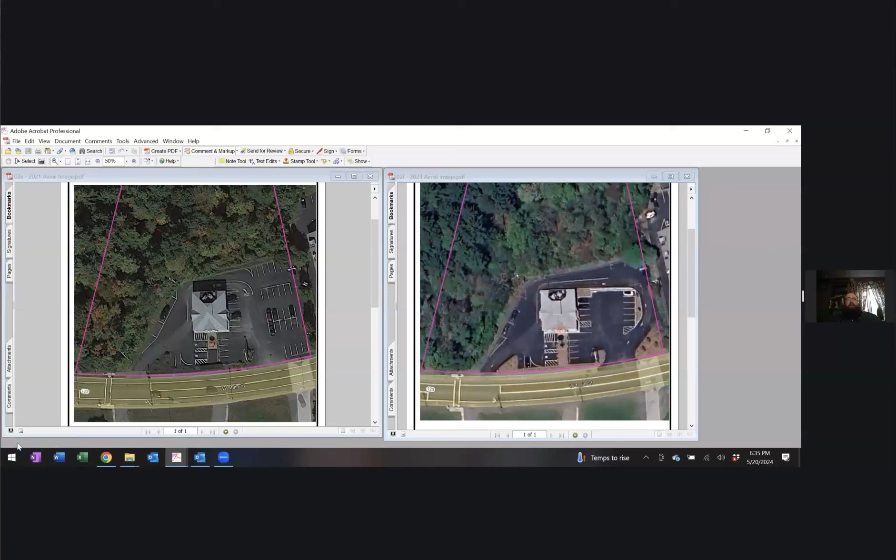We've taken a pretty deep dive into this as far as what they did, and that's where the plan comes in. The things that you see shown in red are the things that changed on the site. So first, what you'll notice is that this whole area here and this area that is admittedly outside a buffer zone turned pervious from impervious. So that is a benefit, basically. It helps with stormwater retention and things like that. The other thing is there was a small addition of pavement in this area here that I believe was just kind of squared off to help cars get past the building and give a bypass lane to the drive-through aisle.

So they did create about 130 square feet of impervious surface within the buffer zone. You'll note just by these dimensions, it's about 2 feet further away than the closest point to the BVW was prior to that. It did not require any additional tree clearing or anything like that. It was just an area of lawn that was turned into impervious.

But the other thing that you'll notice is whoever did this did it with the existing drainage structures in mind. You'll see if we zoom in, there is an existing catch basin in this location. This was existing prior to the changes, as was this. So all of the stormwater that collects here is still directed to the catch basin that it was originally directed to. So stormwater conditions on site, stormwater patterns haven't changed. All of the runoff is still going to the same area that it was before.

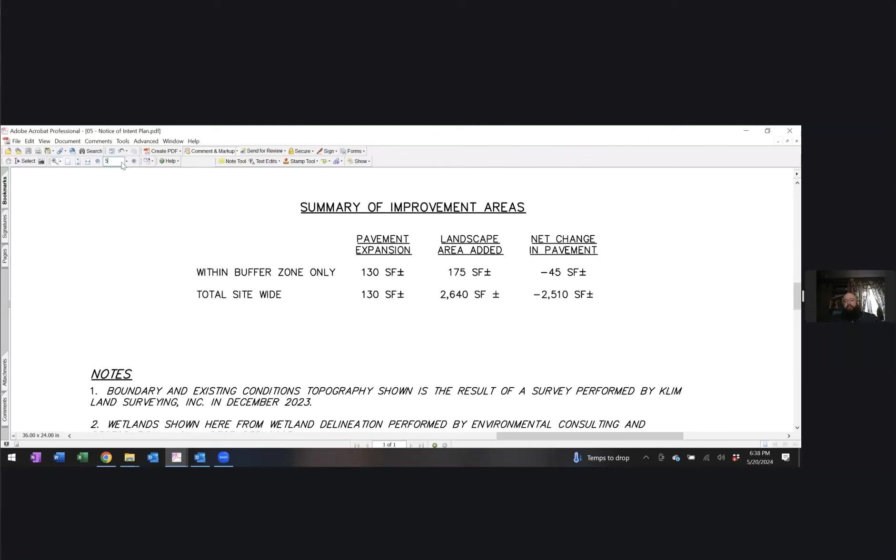So if we just take a quick look at the side of the page here, we'll see that we ran some calculations, and within the buffer zone, they actually reduced pavement by 45 square feet. It's very negligible, but so be it. Total site wide, they reduced by about 2,500 square feet. So again, I think that's actually an improvement over the existing conditions, or the prior condition, I should say.

You know, knowing this commission, I would posit that had they come forward with a notice of intent to do this work, I believe an order of conditions would have been granted. And I might go as far as say it may have been possible to file an RDA on something like this, considering that it's really just a reduction of impervious surface.

So what we're asking tonight is that the commission, really just to dot the i's and cross the t's, will issue an order of conditions for the work after the fact. And then our plan would be to let the appeal period lapse and then file for a request for a certificate of compliance as soon as possible, just to get everything in good standing where it's supposed to be. So Mr. Chairman, that's all I've got. I'm glad to answer any questions.

So currently the stormwater system is functioning normally, and there were no performance problems with these changes, I'm assuming? None that have been reported to us by the owner of the property or that we've heard from the town at any point. So we have no reason to believe that it's been an issue at all. And this was initiated by a change in the property owner? Is that part of it, or?

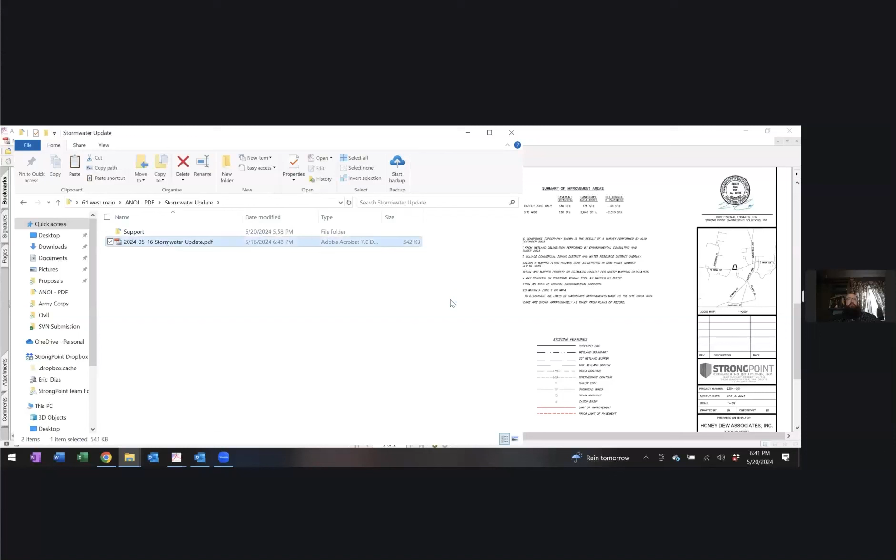What was the nature of that information? Was it, because one of my first questions is, you have catch basins to capture the flow, but you didn't talk about where that discharges and what the existing water quality features are? Sure. In fact, let me pull up that stormwater update and I can share it with you right now. Mm-hmm. So what we did just in response to Jacqueline's request is just go through and enumerate how this particular change affected the performance standards given in the stormwater management handbook.

So basically standard one is no new discharges, and this work did not result in a new discharge to a wetland. Everything goes to the place it went before. I'll group these together for peak rate attenuation, recharge, and water quality. Just basically, even without running the numbers, anytime we reduce impervious surface that vehicles drive on, we lessen peak rate runoff. We increase the ability for recharge and water quality on the site. So those are a benefit. The last few standards, 5 and 6, do not apply. 7, this is a redevelopment project, so the standards would apply to the extent practical.

Standard 8, unfortunately, we missed the bus on construction period controls because this is after the fact. 9 is an operations and maintenance plan. We're operating under the belief that there's an operations and maintenance plan in existence for this because we don't know of any issues that we've had so far or that have been reported to the town. So the applicant has just agreed to keep maintaining the system as he always has. And number 10, we actually did, because I don't know that this exists, provide an illicit discharge statement. That basically just says that we're not aware of any, and we will continue to make sure that none come up.

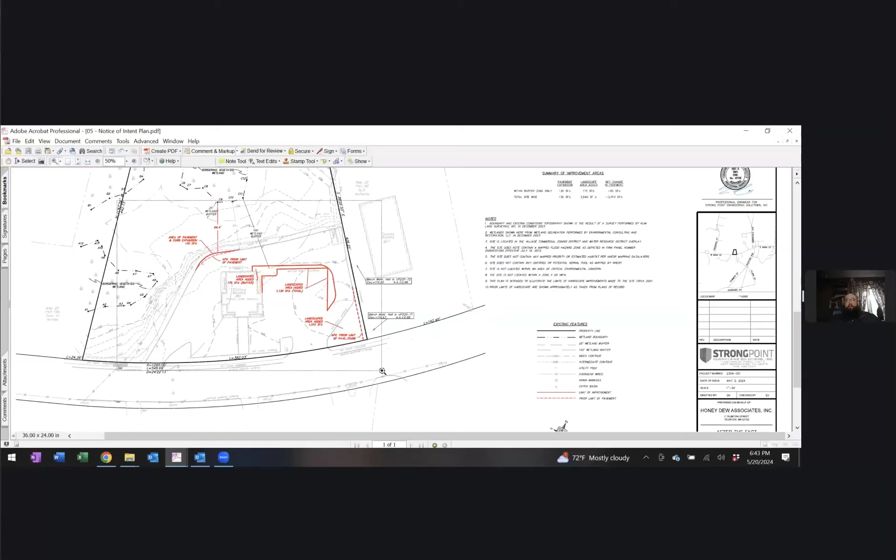So they're operating under an O&M plan that tells them how often to clean the catch basins and whatnot. Can we get a copy of that? Yeah, I can either find a record of it from them, or for that matter, if there's something that doesn't necessarily exist or might be subpar, we can even beef it up and make it better. Okay. And so can you just go back to the site plan, where that discharge is now, and if there are any water quality units on the site? Yes. I do not believe, just from a visual inspection, that there are any water quality units on the site. The only thing that we were able to find, as far as we looked at this point, was just these catch basins that you see throughout the site. There's one here, here, here, here. There's 5 or 6 of them.

Yes, go ahead. Oh, so does it discharge to the municipal system, probably the state system in 123, or does it discharge to the wetland? Well, I don't know for sure. We didn't check that far because what we considered for our purposes now is that the water is going to all the catch basins that it was before. Everything appears to be functioning properly. But my expectation, just looking at this, I think the catch basins that are closer to the frontage are going out to the municipal system, and the stuff in the back is going to the wetland one way or another, whether there's subsurface infiltration. I tend to doubt it; this was built around 2000-ish. So it's probably a free discharge.

So there's no provision for water quality, because typically when somebody comes in for any type of project, redevelopment or not, we look to try to improve water quality. Now, granted, removing several hundred square feet reduces impervious surface. It does not treat pollutants associated with probably a high turnover of vehicles here, pollutants such as oil and grease. So I think personally, I would want to know, first of all, where the discharges go before we think about what we want to do to improve water quality out here.

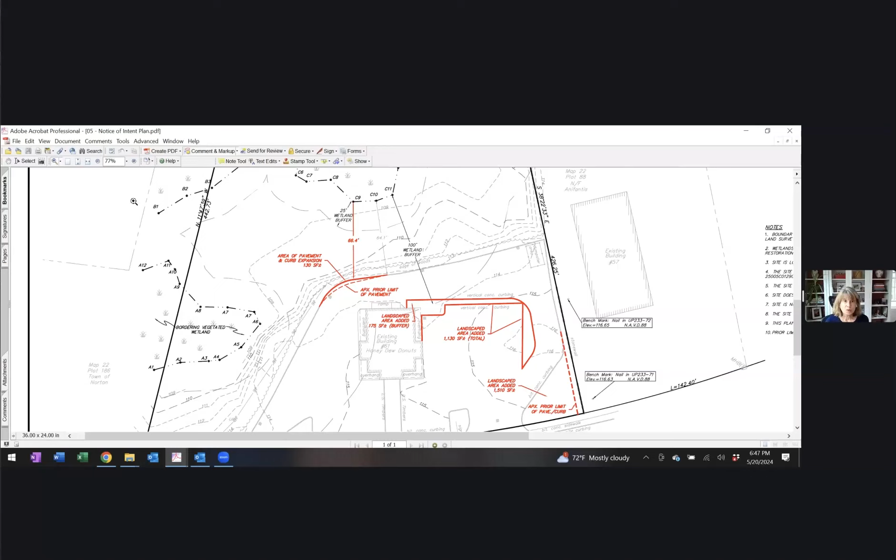Yeah, certainly, we can get that information. The only point I just wanted to add on to that is, the only reason that we didn't chase it that far was because, again, as a redevelopment, it would be subject to the maximum extent practicable. And where this is an after the fact situation, we thought, okay, well, we are having an improvement, we're flowing to the same spot. Didn't know that much more would be warranted, but certainly we can dig more into that if we need to. Right. So after the fact doesn't absolve you from meeting water quality standards, or at least addressing it to try to improve it. Understood. Thank you.

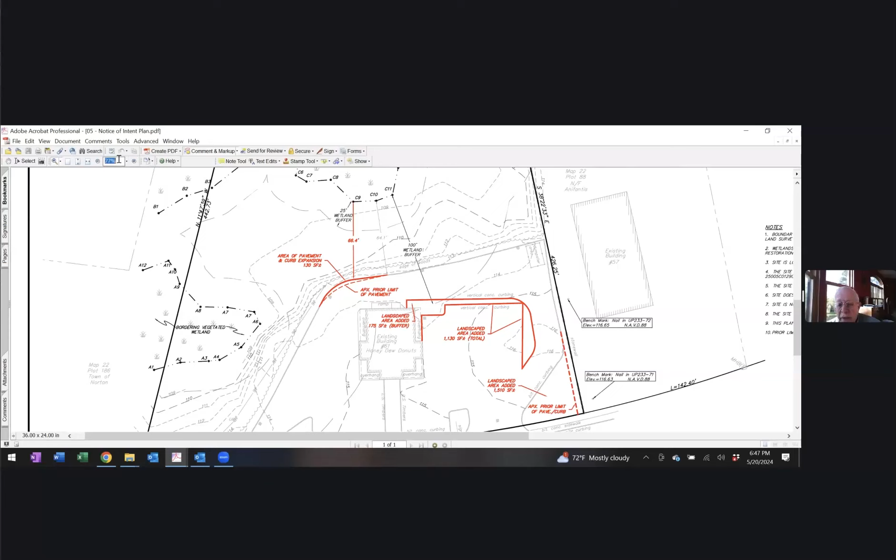Further questions from members of the commission? Any questions from anyone in the hearing? And just to review that, you can go to the reactions button, and when you press it, there's a hand raise button, or you can just speak up to be recognized. But this is not a big project, since it's already after the fact.

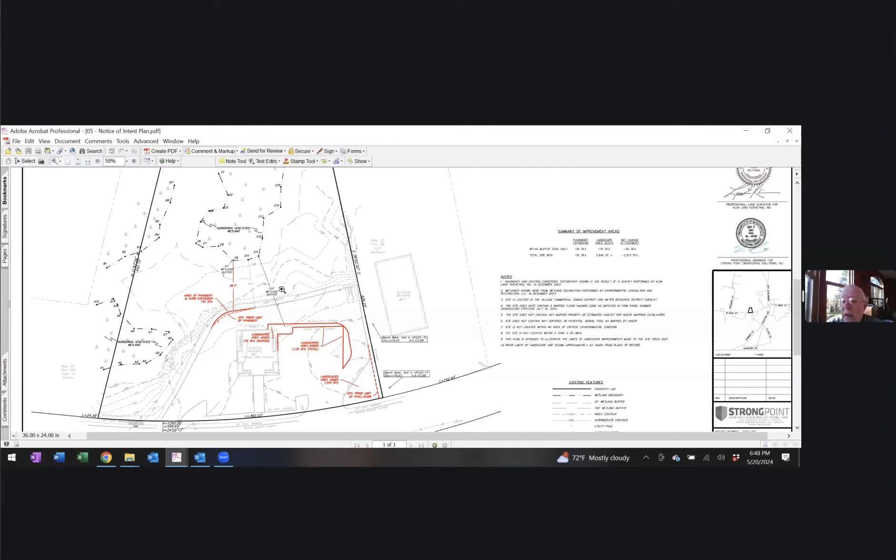So we're not going to be closing any hearings tonight because our director is unable to attend, and he'll be reviewing the tape on this. But our next meeting, I believe, is June 10th. I assume you would be amenable to continuation until then? And we can also deal with the questions that were put forth tonight. So if we're all set with that, we can consider a motion to continue this hearing until June 10th.

So moved. Second. We have a motion by Joe, seconded by Dan. As is necessary, roll call vote, starting with Paxton and Dan. How do you vote? Aye. Aye. Mark and Joe? Aye. Mark, I didn't hear. Joe and I spoke at the same time. I said aye. Okay. And Lisa and Tama? Aye. Aye. And I'll say aye, so motion carries. Thank you, Eric. We'll talk to you next time. Thank you. I'll get that information and get back to you. You bet. Thanks.

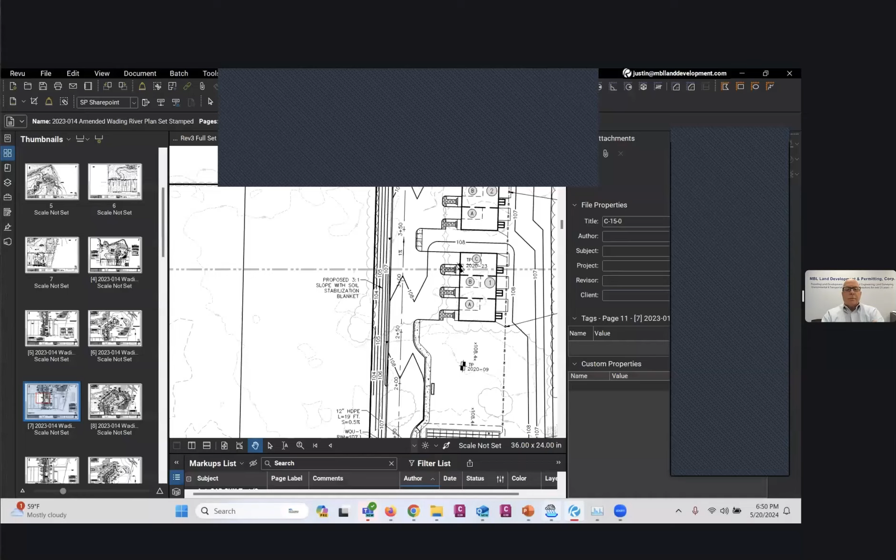Our next new public hearing is file number 250-1052, Wading River Estates. This is a previously presented project, but is now requesting an amendment. Do we have a representative of the applicant? Yes, I'm here, Mr. Chairman, members of the commission. Brian Dunn. All right, and I'm assuming you probably have screen sharing capabilities. I'm gonna have Justin Williams from my office share his screen. Megan, can you give Justin sharing rights, please? Hello. Let me know when you've got the screen ready to go, Justin. Here we go. All right, we see a plan.

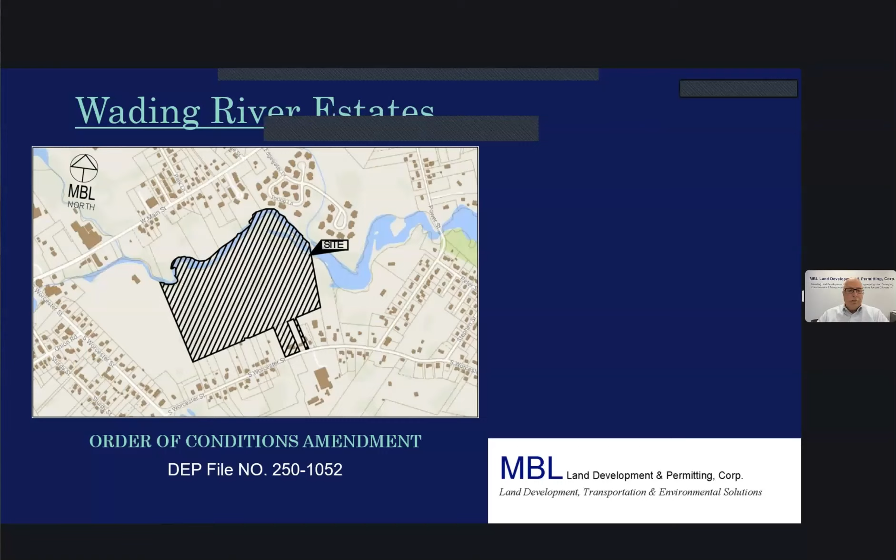So, members of the commission, my name is Brian Dunn with MBL Land Development and Permitting. Our offices are located at 5 Bristol Drive in South Easton. And Justin, you're gonna close your web browser. Or is that mine? Okay, thank you. And I'm the principal of the firm. We're here on behalf of Joan and Scott Stormo. As you know, we've been in front of the commission. We do have a DEP file number, as you can see on the screen. We do have an order of conditions for this project.

And what we've done is we've come before you recently, within the last few months or so, and discussed the process of filing an amendment to the plans. And it was our understanding that the commission was willing to go along with a review of the request for the amendment. So we've submitted a request for that amendment, and we've prepared a slide presentation to give you an understanding of the differences from the originally approved set of plans to the amended set of plans. The number of units is the same.

As you can see, the left-hand side is the original design, which utilizes the existing home at the front of South Worcester Street, and then the units coming into the site, and then the proposed septic system in the middle of the site, and a little bit off the page is the drainage basin that was originally designed. So you can see where the units were originally laid out and the limit of work and the limit of clearing. On the right-hand side, there's been a large reduction in the amount of pavement. There's a reduction in the amount of clearing, limit of work. And there's also been a reduction in the area of the buffer zones with this revitalized plan amendment. So if you want to go to the next slide.

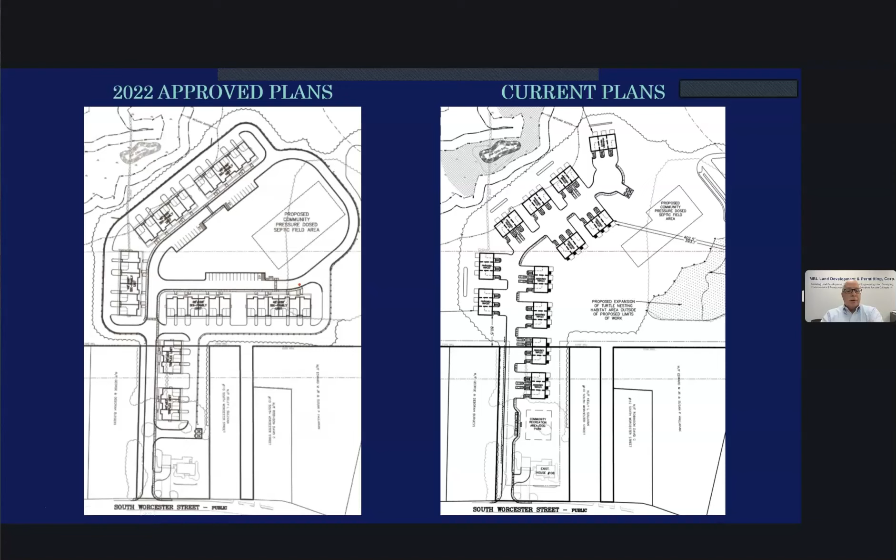With that reduction in pavement that we originally discussed comes the length of road. As you remember, we had originally had pavement going around the units and around the septic system because of the style of the homes and the design of them, as you can see from the left side that Justin's pointing to. So most of that area is being removed, and the pavement behind the homes is being removed and replaced with lawns and grading and sloping down to that 25-foot no-touch alteration zone, with a reduction in the retaining wall for the pavement that was going around the back of the units.

So that reduction in roadway length is about 1,000 linear feet of roadway that we're reducing as part of this plan amendment request. And the increase in open space. So with these revised set of plans, we've got a 47% increase in open space and landscaping areas that weren't in the originally approved plans. Next slide, please.

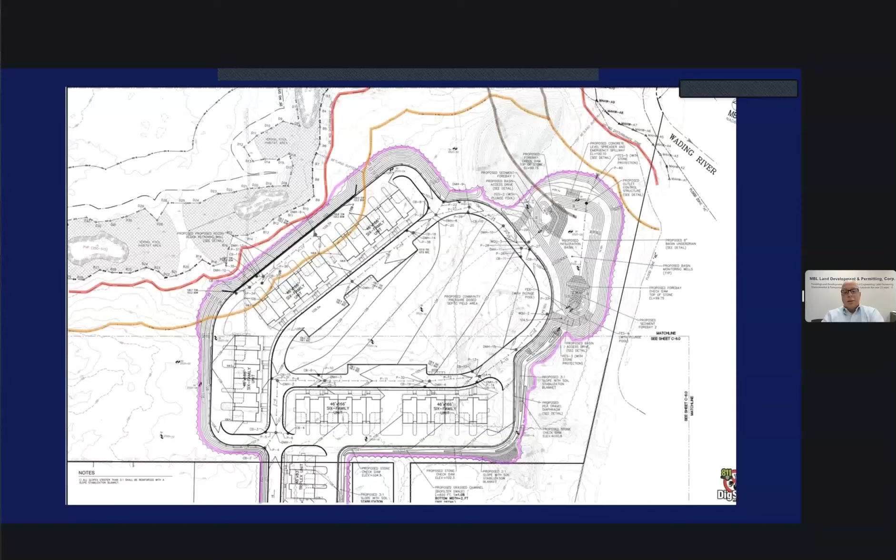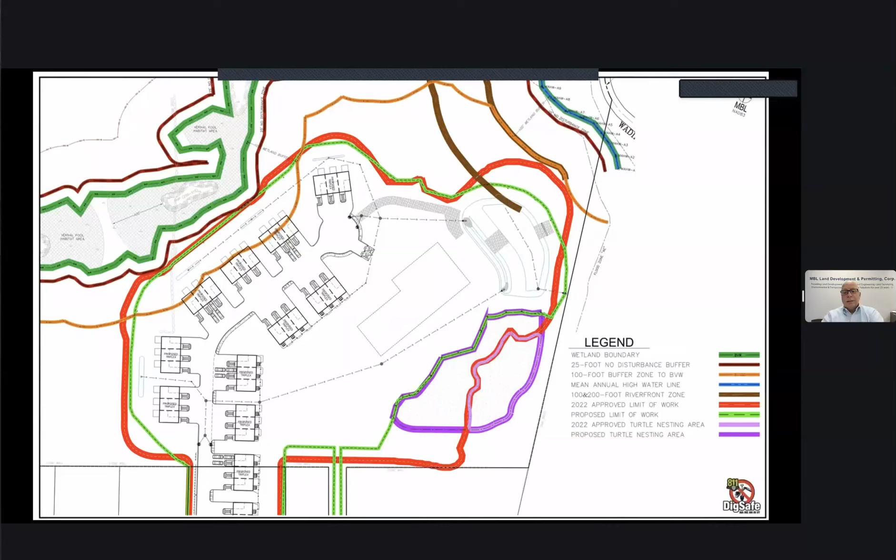This is a little bit more detailed layout plan to show you where the units are, the turtle nesting area, where our proposed drainage is going to the right, or to the east of the site, and the area of clearing, the new tree line, which is the limit of work, which is also shown in this plan. As you can see, we are still outside of that 25-foot no alteration zone. Next slide.

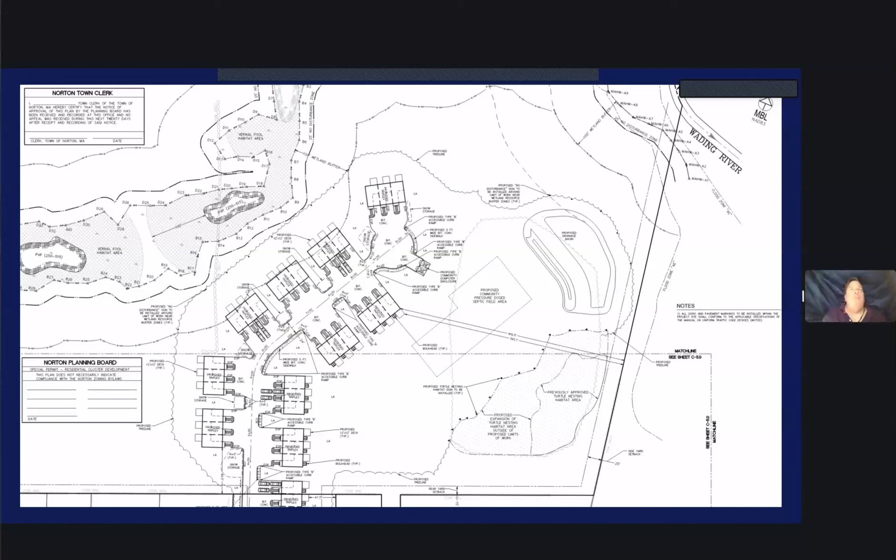And this is a portion of the site plan, the grading and utility plan that we prepared. As you can see, we do have a stormwater basin for our drainage design. We have forebays, water quality structures. There's 3 of them. We have our drainage basin with the 15-foot bench around the top for access and maintenance. This design here also reduces the amount of fill by roughly around 20,000 cubic yards of material.

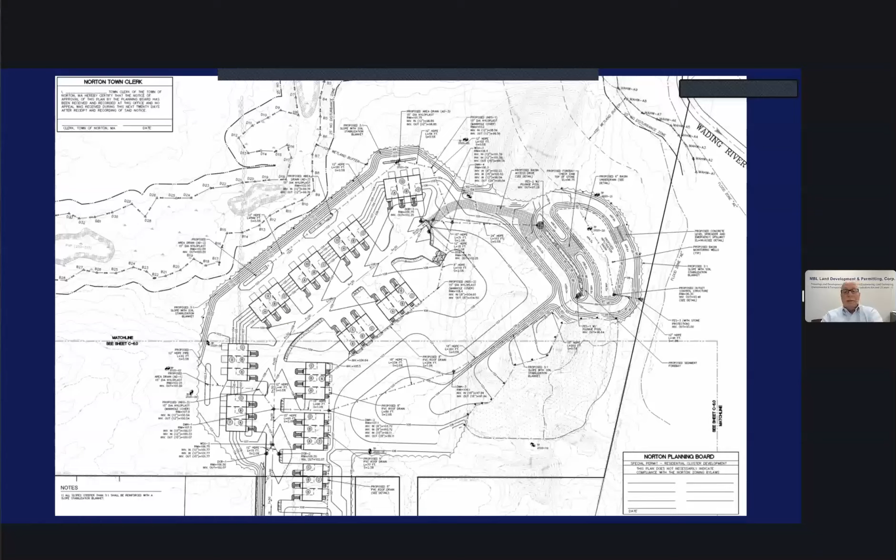And what we tried to do on this slide is show you the difference of the fill and the cut areas for this site. And you can see just from the 2 pictures you have in front of you, in regards to the earthworks, the difference in the size and the magnitude of the project that has been reduced as part of this plan amendment. And I think I said 20,000 cubic yards, but we have right here about 25% reduction in the amount of fill material that's needed for this project, which also makes it more economically viable for our owners.

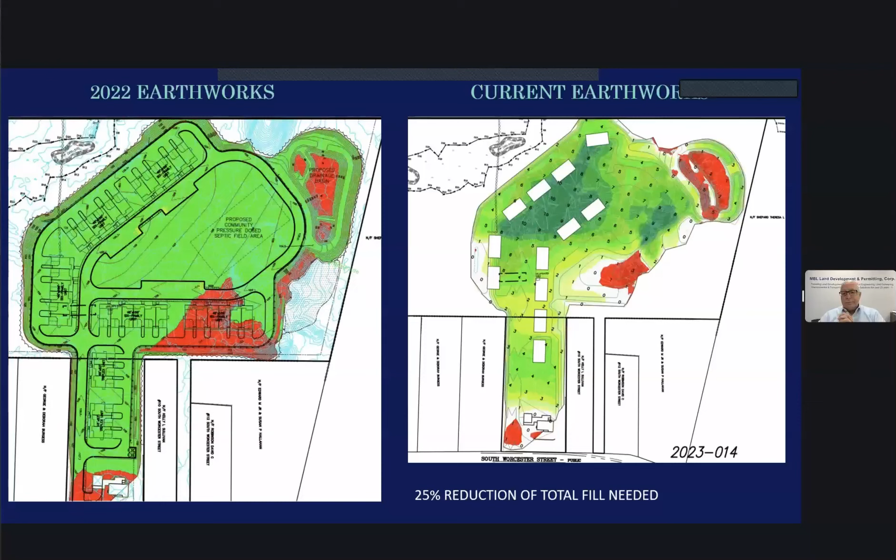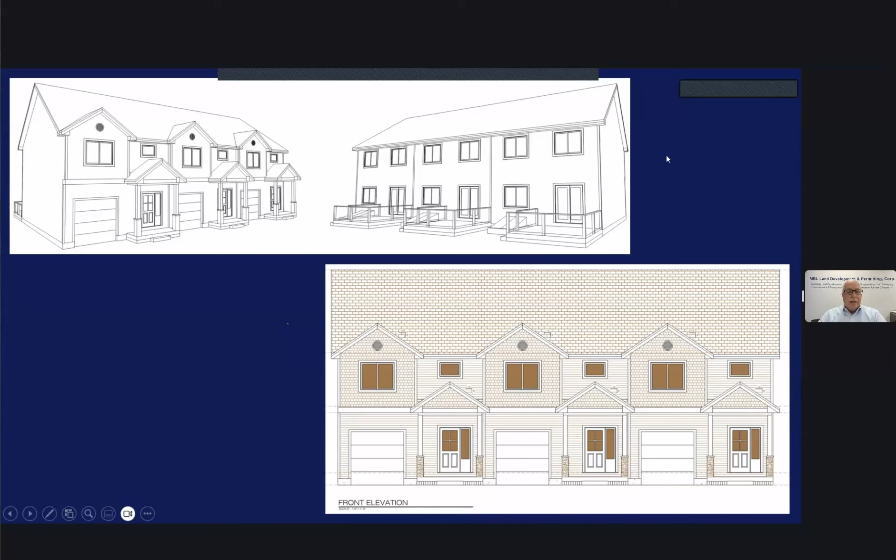Next slide. And then these are the new design of the units, the triplexes. They all have a one-car garage. They have decks in the back. They will have basements here. So it makes it a little bit easier for the grading and the design of the site, and helps us out with minimizing the amount of fill. Mr. Chairman and members of the commission, that's pretty much our presentation with our request for a plan amendment. If you have any questions, we'd be more than happy to answer them at this time, Mr. Chairman.

Yeah, I'm just wondering if the fire department has reviewed this new design, because they have a tendency to like to have an access road behind the buildings, but that's obviously not our purview. That's obviously a detail you're gonna have to review. Yes, we're going to be in front of the planning board, and I'm sure that the fire department will chime in at that time. I can tell you the fire truck access through the site, down the roadway to the cul-de-sac, is large enough for the fire truck to enter and turn around in the site.

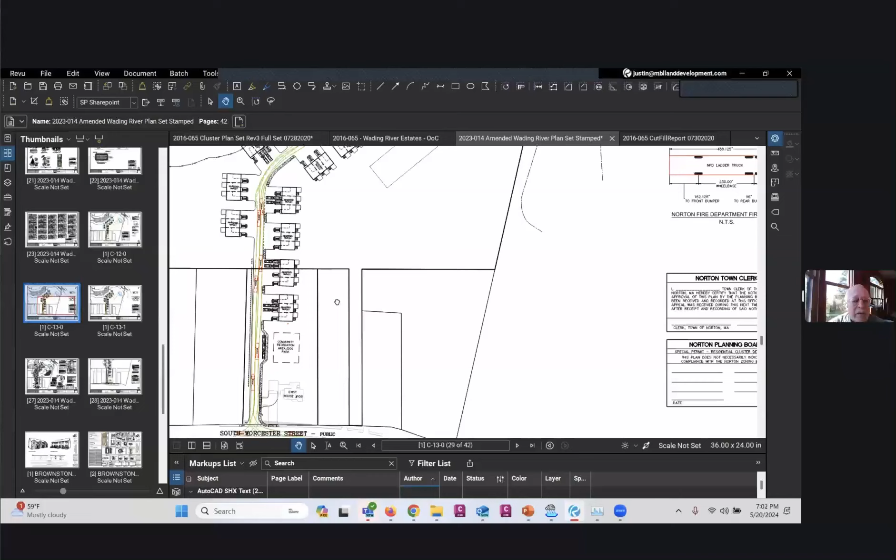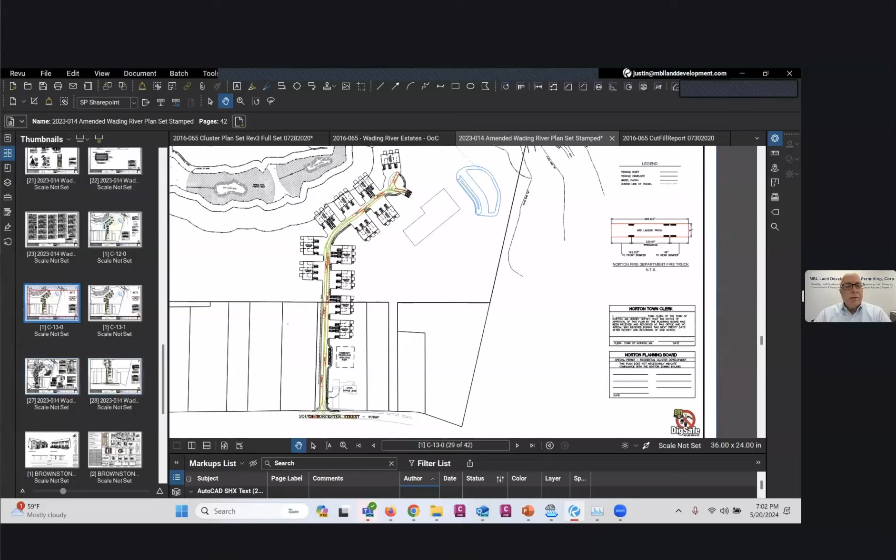Yeah, we don't have to review that here. What you had before, you had pavement behind, so they couldn't complain about that. Clearly from our perspective, it meets the intention of the Wetlands Protection Act. Yeah, Mr. Chairman, I think this is a much better plan. It's more environmentally sensitive, and with the truck traffic on construction and the amount of fill, it's a lot better plan, because it was really driven by the style of the units before. The units were all on one level, and here we can step the foundation in the back of some of the units, so that we don't have a lot of fill coming in. So that's where that 25% reduction is coming from.

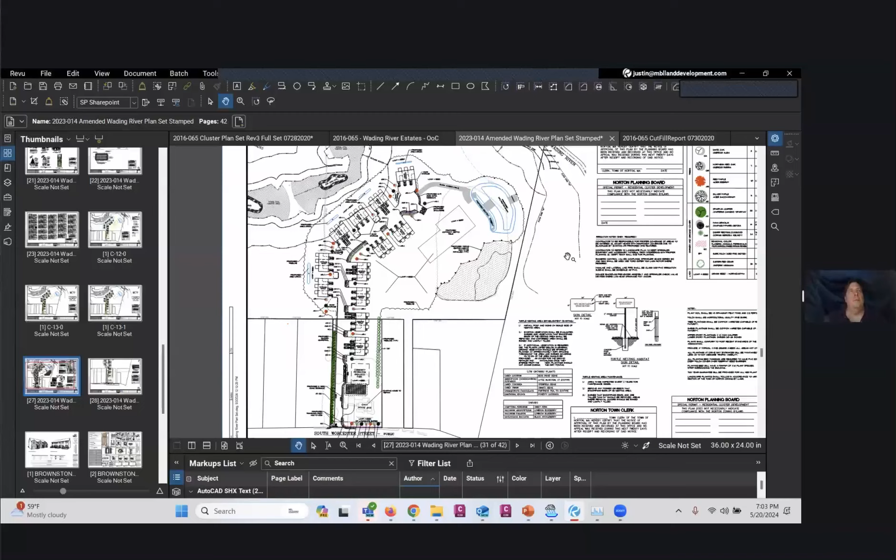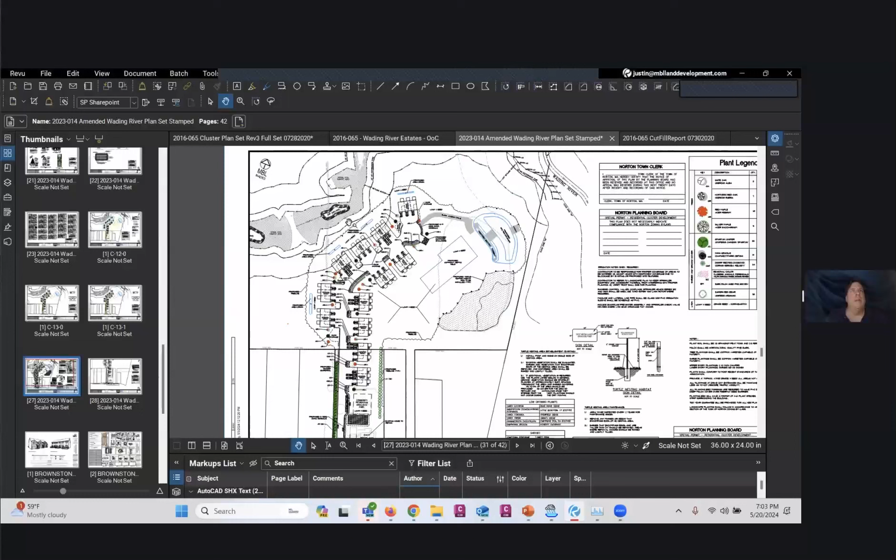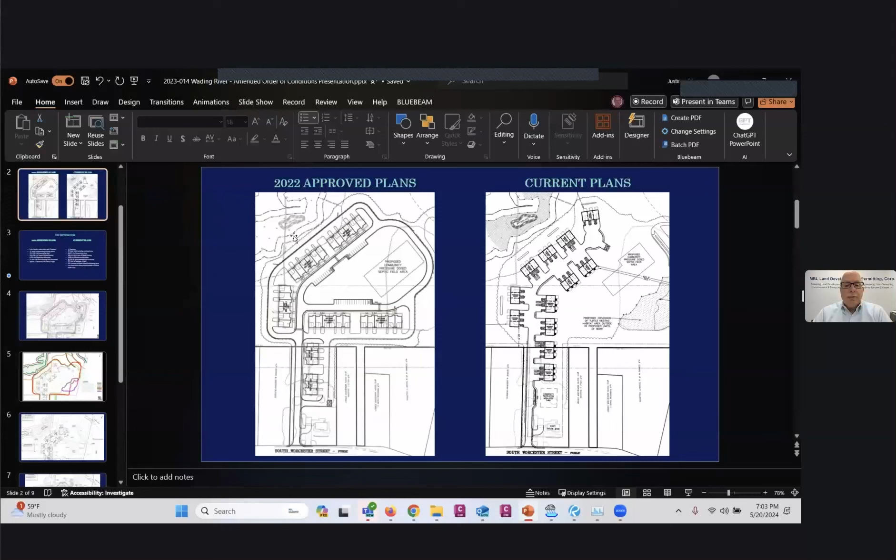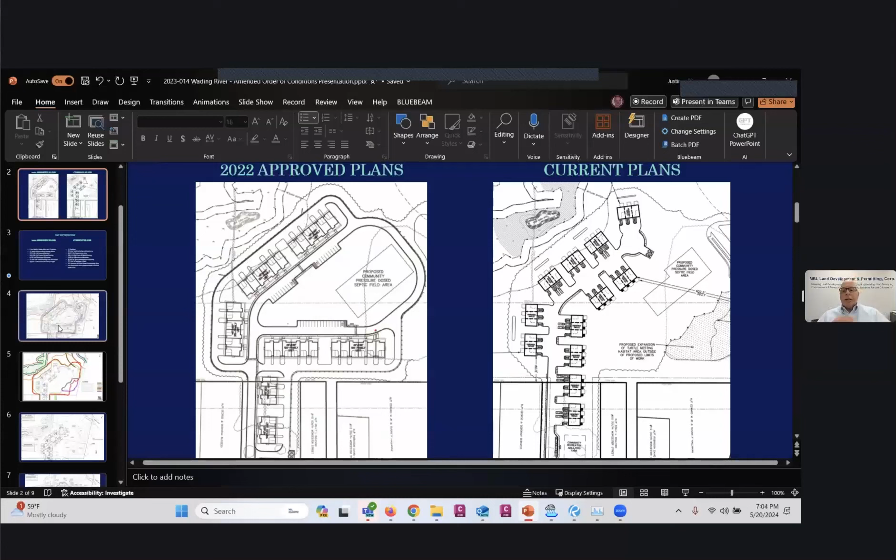All right, yeah, go ahead. First, I appreciate this being a more environmentally sensitive change. That section in the northwest of the site, maybe I misunderstand, but is that line indicating that all that part is within the 25-foot buffer zone? Or how have I misunderstood? Could we see maybe the first slide again? Yeah, I think it abuts right up against it. So originally we had it approved right up against that 25-foot buffer zone in that area. We had some tree clearing right up against that zone, and we had a retaining wall to keep the fill away from that 25-foot zone, and we're still maintaining that in our new design. You can see the grading and the retaining wall that we had.

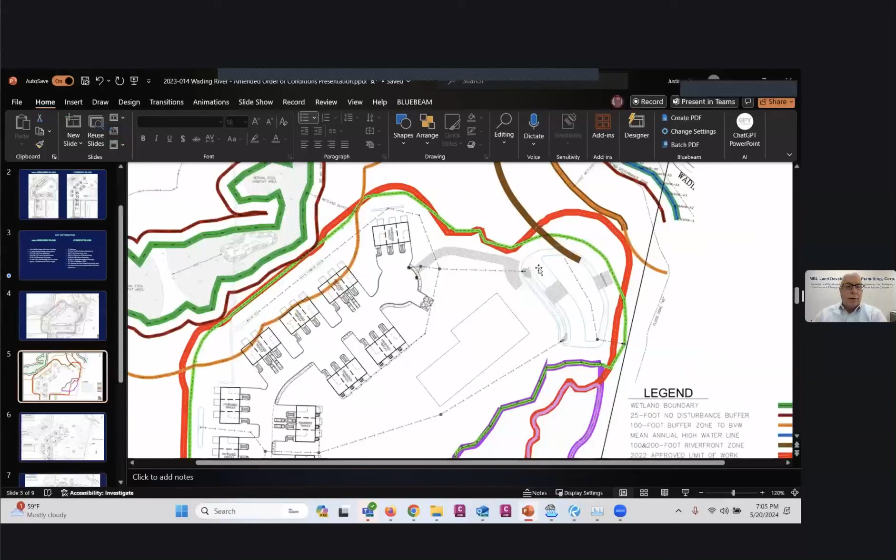Justin's zooming in. So the red line is the 25-foot buffer zone. The purple line is the limit of previously approved work. And the tan line that's running through some of the sites? That's the 100-foot buffer zone. Okay, I see. And then that brown one to the east he's highlighting, that's where the riverfront area comes into the site. Part of the riverfront regulations does allow and permit the construction of a detention basin within that zone. And that's the area we had the drainage before, or we wouldn't have gotten an order of conditions. And if you remember, we got this order of conditions with some of the members that are on this commission, and your agent at the time was Jennifer Carlino.

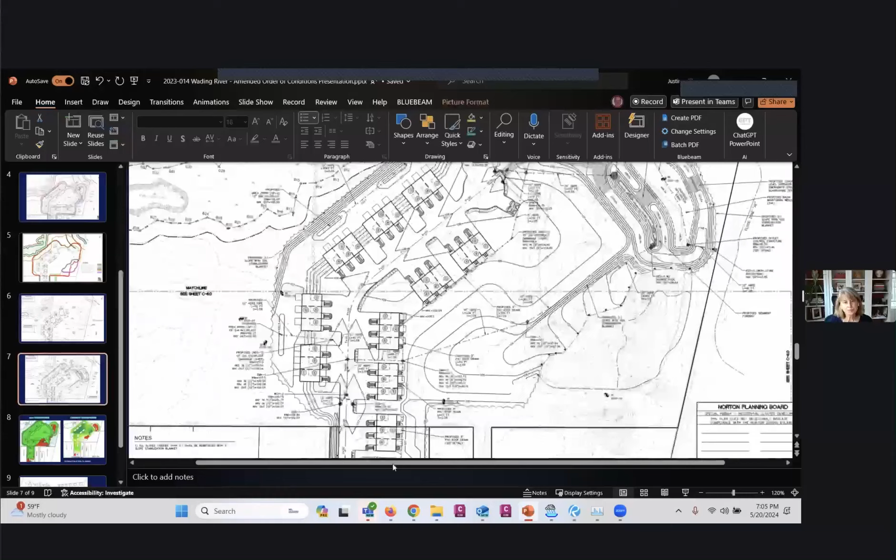Could you just go over what the common space is gonna be, the open space? So there's a bunch of different common spaces. We have a community area here to the rear area of the existing house lot. And then there will be an area of open space and common space above and around the proposed septic system. A very, very large area.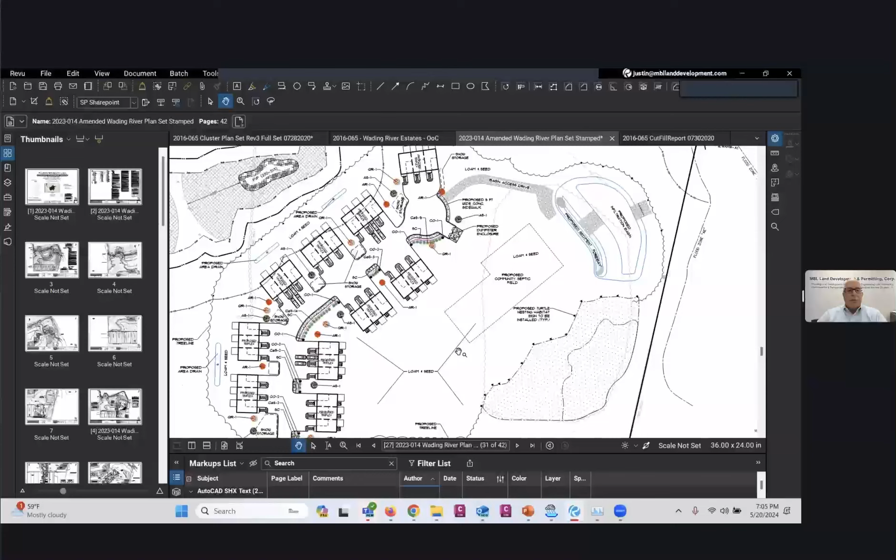Okay, I assume this request for amendment has gone back to Natural Heritage for review and approval? As far as I know, I don't remember this being part of Natural Heritage. But you have turtle nesting. Yeah, if I may, Lisa, this was under the purview of Jennifer at the time when she was the agent. And she thought, because of the turtles and some of the eggs that she had seen, that it would be advisable to have a turtle nesting area.

This wasn't a recommendation of Natural Heritage. This was a recommendation of your agent. Okay, so you went along with her. You weren't in priority or estimated habitat as far as the state was concerned? No. Okay, I got it. So what we tried to do is review and discuss that information with Jennifer. We came up with a plan to show that turtle habitat, and she was more than satisfied at that time.

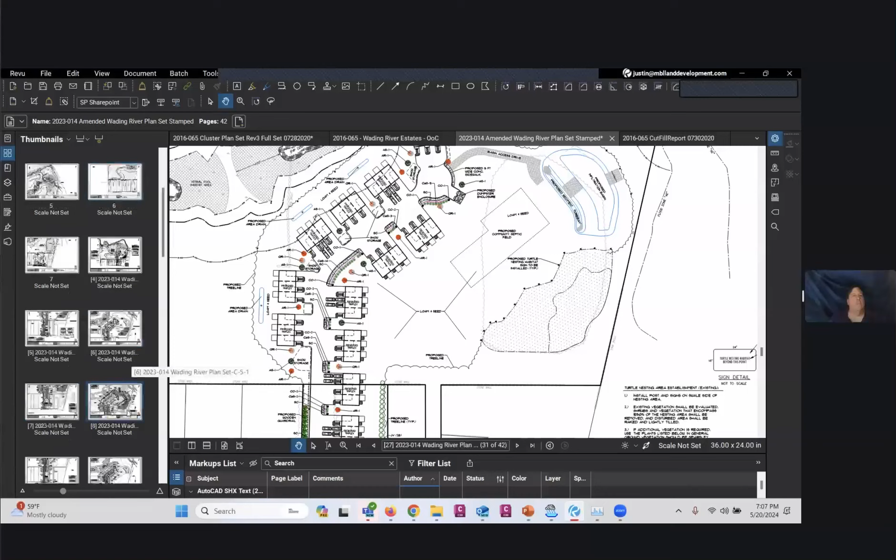Okay, and the last question, I just want to go over that limit of clearing. Now that you don't have to do so much grading, what's driving that? Just the rear of the units. Are those had an infiltration trench back there? So there's really area drains in the back of those units, so that we can still make sure that any of the runoff that's coming from the back area of those units is being captured, and then that's being brought to our detention basin to the east side of the site.

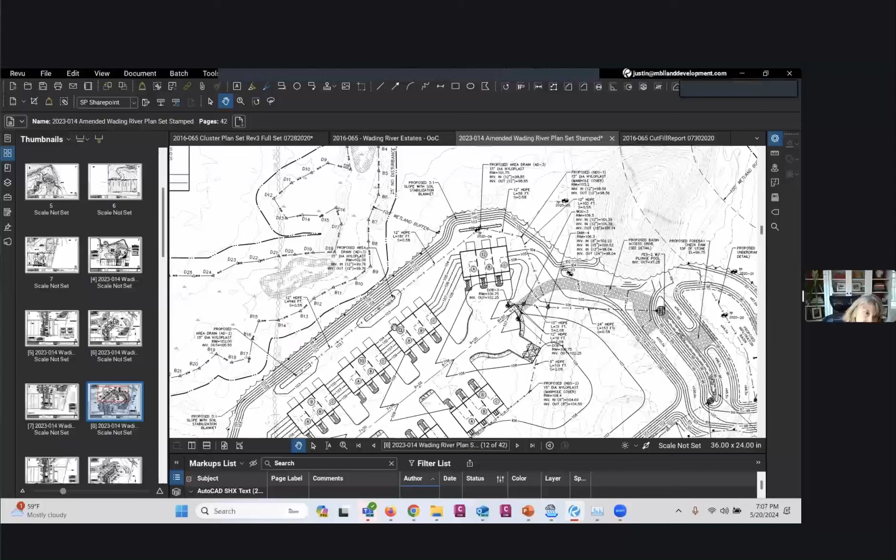Okay, so what is the distance between the back of the deck and into the 25? And did you do everything you could to minimize that intrusion right up to the edge of that 25? It's about 20, 30 feet to give them a little bit of a backyard with like a 2 or 3% slope. Okay, so you still have to have some grading back there, I see, to get back to grade to 98, is it? I can't read that.

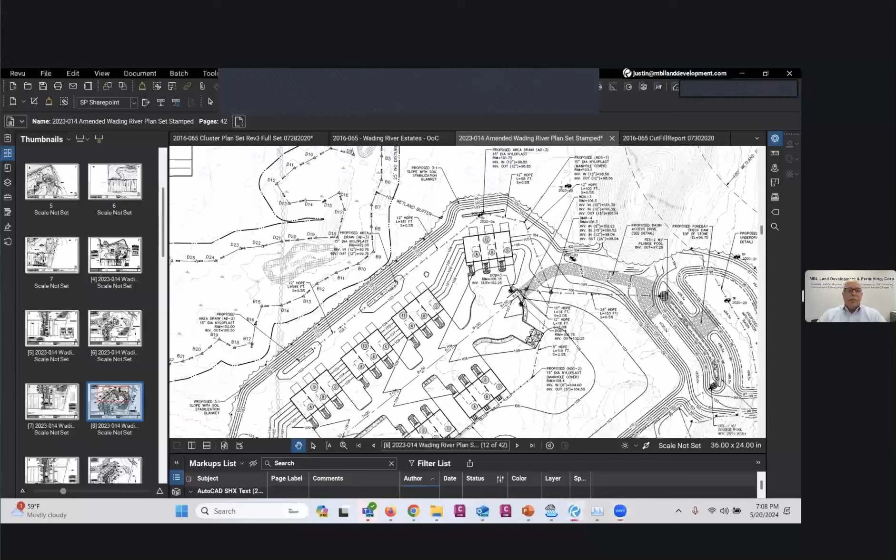Yeah, that's correct. So what we try to do is use the previously approved limit of work, and then bring that limit of work in where it was feasibly possible with the regrading of the site, so that we could limit the amount of fill and also meet the intent of the DEP's rules and regulations on stormwater and alteration of the riverfront areas. There is a reduction in the amount of construction in that area as well, Lisa, in that we don't have a retaining wall at the back of those units that are up against that 25-foot buffer zone. Right.

Did John recommend this one be reviewed? Oh, okay, status of stormwater peer review is pending. And when does your current order expire? So it was issued in 2020? And then we requested an extension through this same board, and it was extended through July 28th of 2025. Okay, so this will obviously just maintain that. It's not extended, so it'll just be through 2025, right? Yeah, that's correct. We're not asking for further extension. We're asking for the order of conditions to be amended to reflect these revised plans. Okay. All right, that's all I had.

And just for the record, Justin, this is corporate, not me. My computer's gonna restart and I have no control over it in 11 minutes and 54 seconds. I don't know how long this install is gonna take, but I'm either gonna try to call in or come right back. All right, so when you say an install, it's an update? Yep, and I have no control when it happens. It just randomly happens. I understand, no problem.

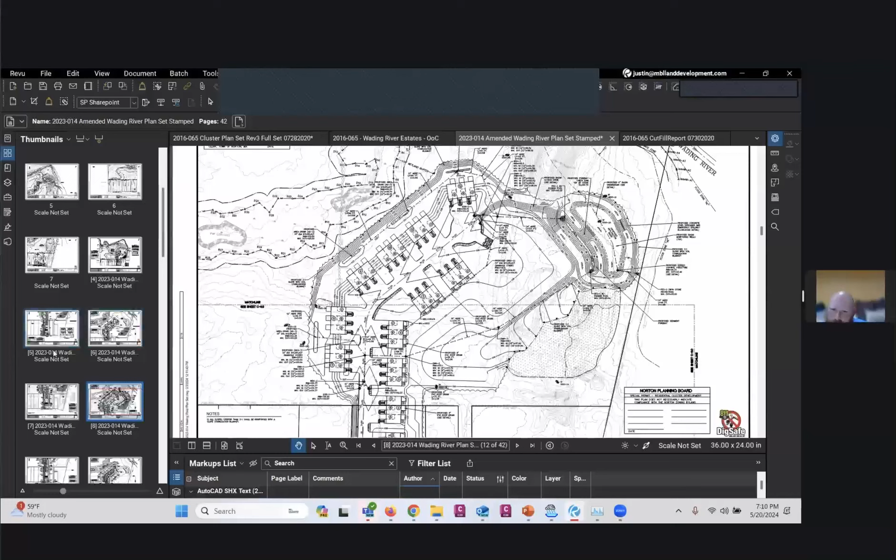Yeah, okay. I have a couple quick questions here. Sure, Joe, go ahead. In this new design, have we accommodated any snow storage on this site? It seems to have squeezed down, so I'm just concerned that there may not be enough space for storage. There's plenty of room for snow storage on the site, and we've identified them in the layout plan. And all of the snow storage that we've shown is outside the 100-foot buffer zone.

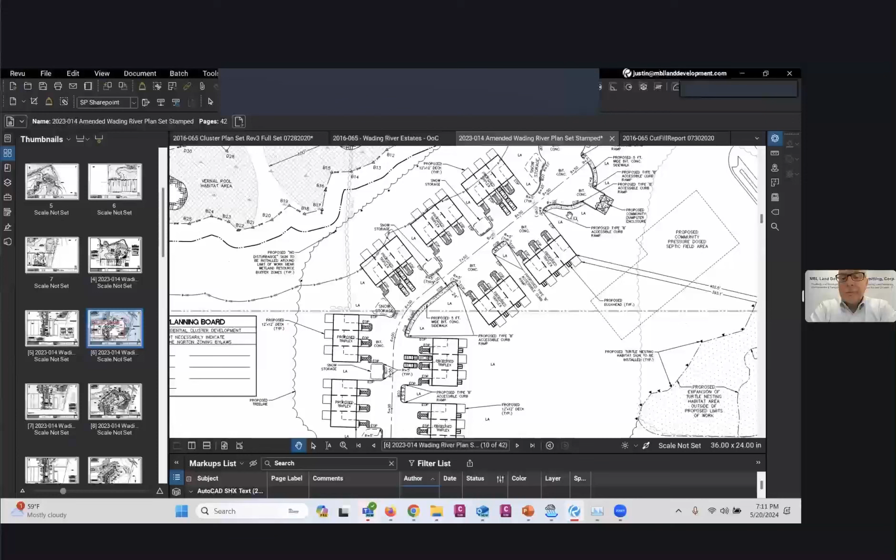And do we have any drainage in those areas? I'm struggling seeing collection. Yeah, most of those areas that we've shown are really landscaped areas. There's no intent for any of the snow to be pushed into the basin, so there's really no provisions for a snowplow to get down to the basin area. So any snow storage areas would be west of the basin and inside of the landscaped areas that we have shown on the plans.

Just to be clear, there is no catch basin drainage system on this site? No, there are catch basins on this site to take the storm water underground and bring it to the forebay and through the water quality structures that we've proposed. But are they associated with the road system? Some of them are in the road.

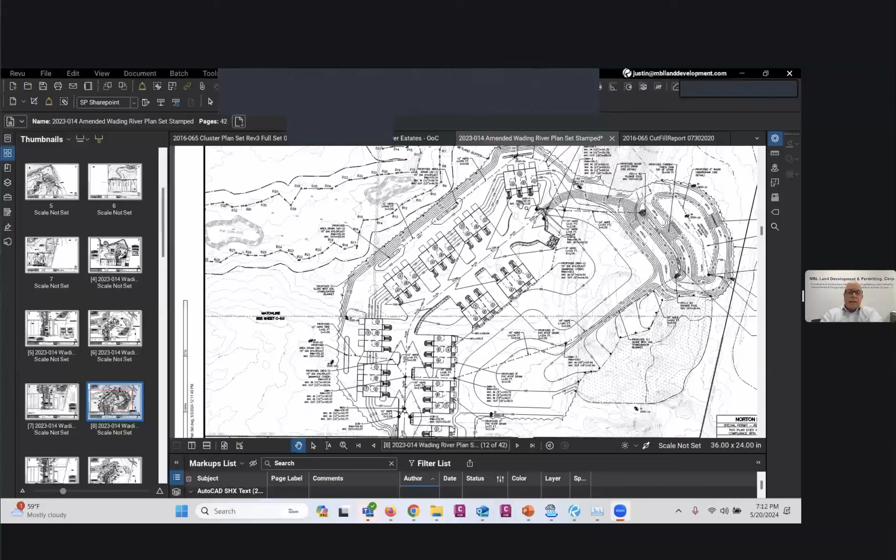There's catch basins at the cul-de-sac. There's catch basins in the middle of the site right there. Okay, yeah, where Justin was just shown. There's a lot less catch basins from the original plan. And then the front of the site remained the same, with the trench drain at the entrance to the underground chambers behind the existing house through a water quality unit as well. All right.

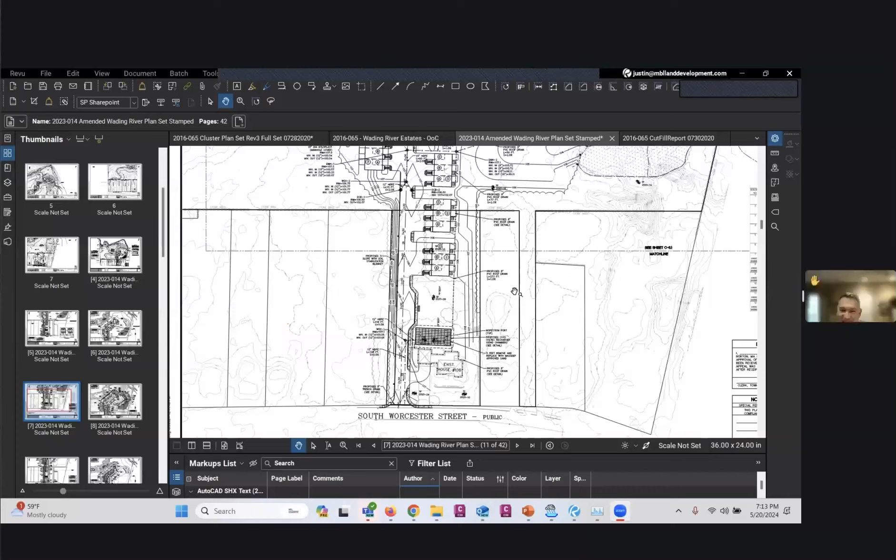Further questions? There's a chat, Mr. Chairman. Right, there's a gentleman with his hand up, so we'll go to him next. But the commission members are all set with questions for the moment. And there's a computer labeled Rob Distel, I guess it is. Yeah, can you guys hear me okay? Yes, we can hear you loud and clear. Okay, so go ahead.

Thanks for including folks remotely. I appreciate that. I'm a resident down the street. I'm not that close to this. I'm catching up on it now that it's under further development. I was just curious, and maybe this is a question for a later time, if plans are approved by the commission and the town eventually, when does the overall project get started? And about how long would it take to complete the new plans? Just as an estimate, that's all.

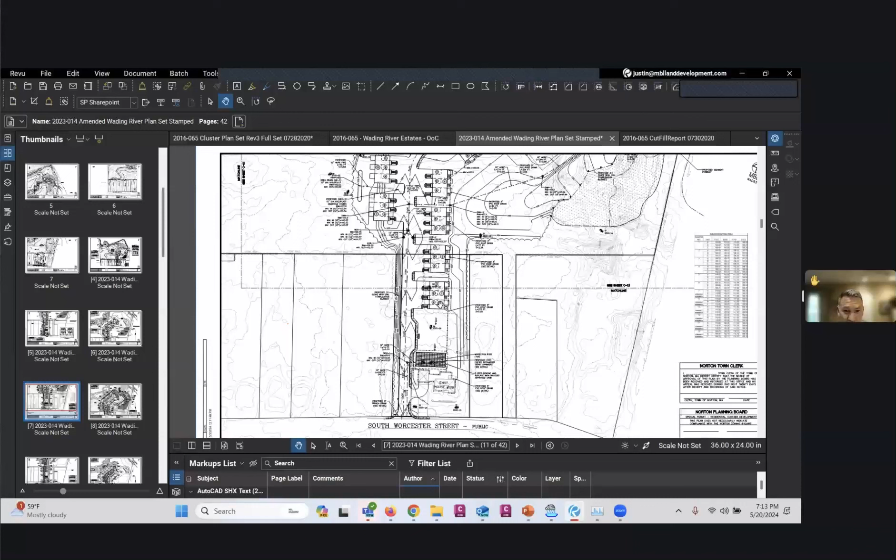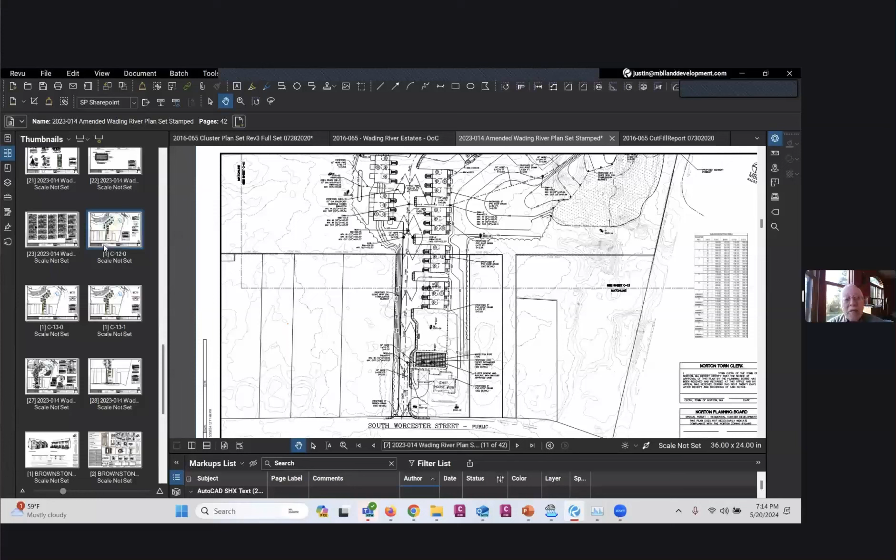Well, let me just comment and then the applicant can comment. Sure. The issue as to whether they get built depends on the economic conditions and the likelihood of economic success. So it's an open question as to when things get started. It depends on financing and all of that. But maybe the applicant can further comment on that.

So through the chair, Mr. Chairman, it is my understanding that right now, technically, we could start work with the permits in hand. Clear the site and start working on the proposed project the way that it sits and has been approved. It is my understanding that our client would like to do a plan amendment to reduce the amount of construction cost and also start to build this project as soon as feasibly possible. They're itching to get going on this, so they want to start construction right away as soon as the plan amendments have been issued by the town.

All right, and just to comment on that, as you might have heard from our prior hearing, our director, John Thomas, is not able to attend. So we're clearly not going to be able to close this tonight. And also there's the outstanding issue of the stormwater peer review. Even though it's changed, a project of this magnitude requires a little help.

Mr. Chairman, who is the company doing the stormwater review, please? I'm afraid I do not know that. That is something that John would have been discussing. Can I comment on that, Julianne? Oh, certainly. Go ahead, Meg. We've sent it out for proposal. We haven't gotten an estimate back. We sent it out to Pat Brennan. If he doesn't respond by tomorrow, we'll send it out to potentially Horsley Witten or Weston and Sampson.

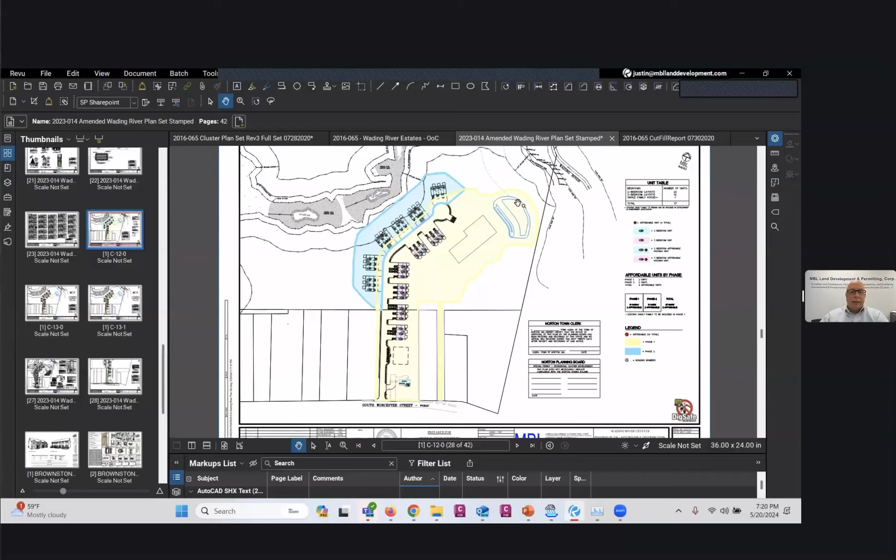We will need to coordinate it when our director returns, because he will likely need to be a part of this, but this can be coordinated through Megan as well. So, Megan, you'll send out an email for availability and suggested dates? Yes, I can do that. Excellent. Okay, and then once we get it staked out, we'll send John and Megan an email that it's staked out, and then schedule a meeting after that on site.

Yeah, the other thing is, I just want to remind you, Mr. Chairman and members of the commission, if more than 3 members of the commission are present at one time, this needs to be a posted meeting to the public, that you're meeting at one place at one time. Actually, there's a variation on that. We are allowed to do site visits. We are not allowed to privately discuss the details without then reviewing those details at the meeting. So, if we have a site visit, we will be doing a blow by blow when it is opened again at the public meeting, and that is consistent with the open meeting law.

Okay, I'm not aware of that, but okay, if you say so, Mr. Chairman. Well, you mentioned Jennifer Carlino, and I think fortunately all of our directors have been sticklers for avoiding violating the open meeting law. And so we are very, very careful about that. John has reminded of that. So you can be comfortable that we're not going to be doing something that's going to violate the open meeting law. And we will review the site visit once a public meeting is again open.

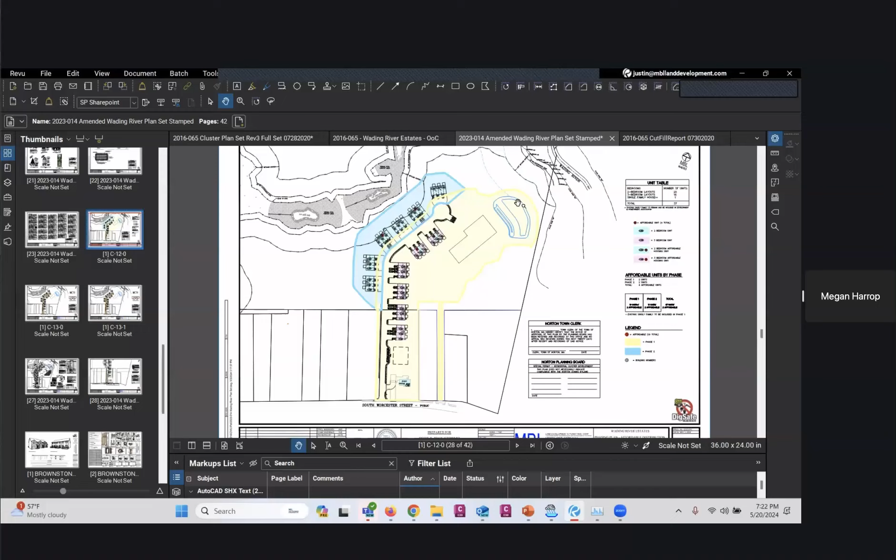So I think if there are no further questions, we can continue this hearing until June 10, and we can arrange the site visit offline. So unless there are further questions or discussion, we're ready for a motion for continuation of the hearing for file number 250, the amendment for file number 250-1052.

So moved. Second. So we have a motion made by Dan, seconded by Joe for a continuation of this hearing. Paxton and Dan, how do you vote? Aye. Aye. Mark and Joe, how do you vote? Aye. Aye. And Lisa, I think, has unfortunately disappeared because of her computer. Tama, how do you vote? Aye. And I'll throw in an aye. So the motion carries.

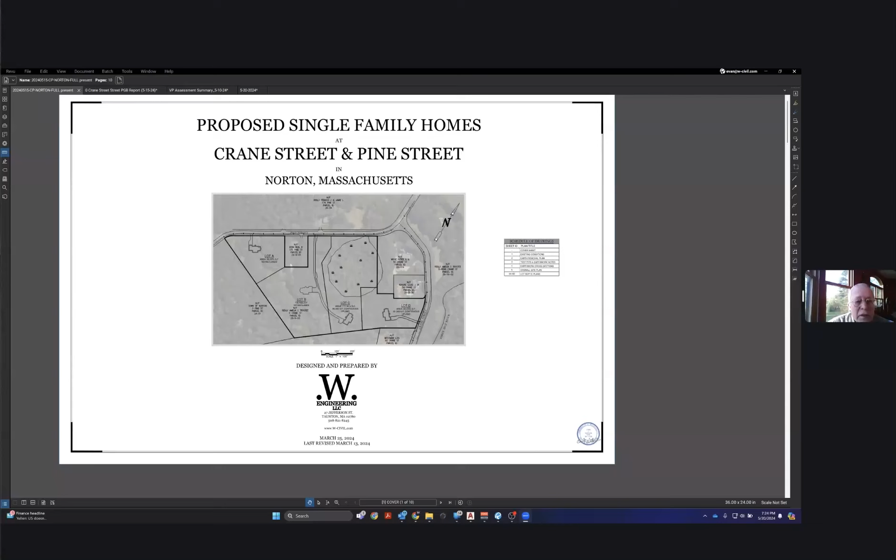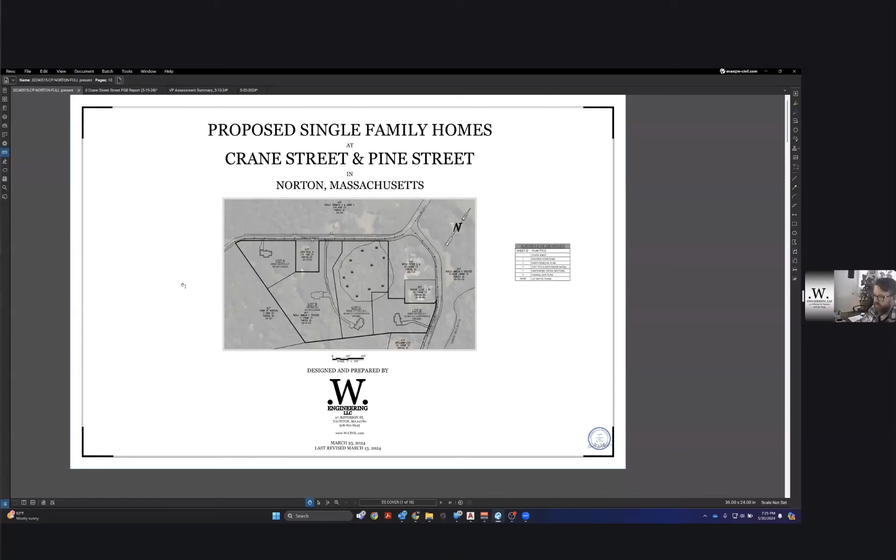Okay, so I'm assuming you have screen sharing capabilities, and there were a few peer review comments that I think your firm responded to, so if you could just review those, that would be great. Well, yes, so thank you very much. Again, Evan Watson here, representing the applicant. We've made some progress on the plans. I think you guys will be happy with what we've come up with. First, we took some input from the board.

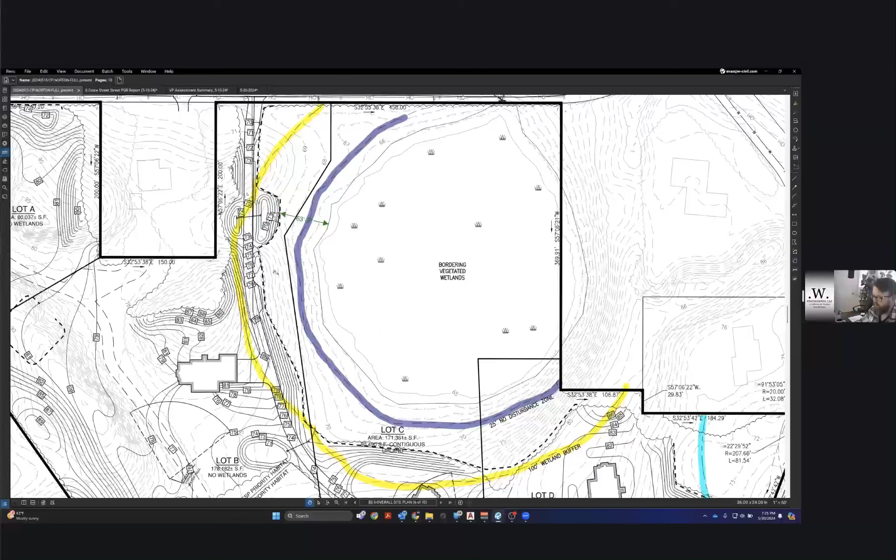There was concern about the location of the shared driveway and the associated grading approaching the 25-foot no disturb zone. The previous plans, everything was outside the 25, shown here in purple. But you can see that we've moved over the shared driveway. We've pulled back the limit of grading so that we have a much greater distance around here to the resource area. I think the closest spot may be this for stormwater, and it's about 63 feet away from the wetland. The other thing that we were asked to do was to evaluate.

Oh, I'm gonna let Lisa in. Oh, do I have to do that? All right, there I did. I guess I'm the host, so. I don't know if you want me to wait until Lisa makes sure she's up and running. We can do that because she has, oh, there we are. Lisa, you're back. I see her. She's back. Great. All right, good news.

So we did have a vernal pool evaluation done by LEC, our wetlands specialist consultant. And John Thomas did want to make sure that they were using dip netting as well as visual observation. So they went out on 2 dates, April 19th and May 2nd. And they're saying that based on the assessment, it does not qualify for vernal pool certification. I can scroll down to some photographs that they took. It was a very, very wet spring. Probably the wettest on record.

And so as such, there was some standing water in some areas. They did find a few egg masses there, but because the water was fluctuating so much, they were likely exposed to dry conditions, and all the embryos died and they were covered in algae. So I think some frogs got excited when they saw some water there, laid some eggs, and then they dried out and came back again. John did say that it would be prudent to still recognize this as maybe a potential vernal pool. So what we've done, we've again taken that into consideration from the last meeting. So again, that was also part of the reason why we moved a lot of the grading away.

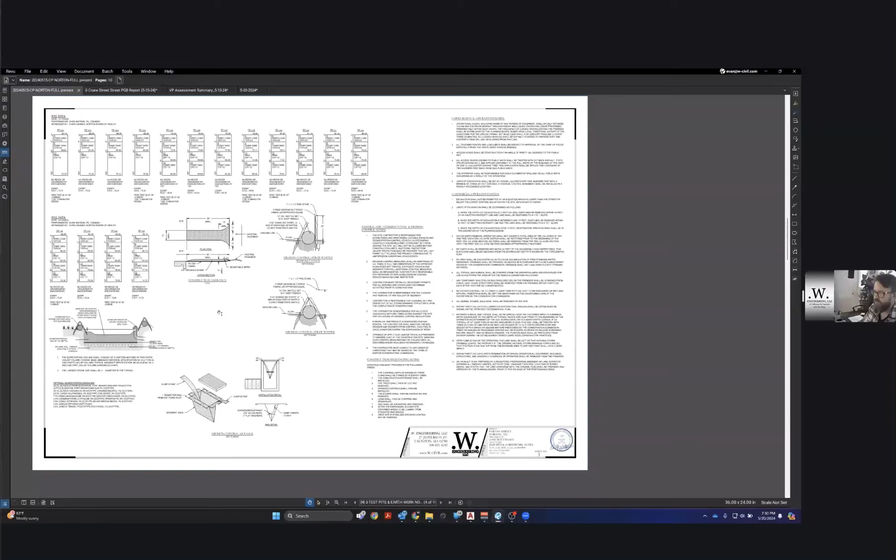We're basically treating the stormwater: each one of these houses goes to a roof infiltrator system, and then the impervious areas from the site are directed towards some bioinfiltration areas. So he asked that we, let's see if I find the detail sheet, add a detail for the bioretention area here, which shows that it has plantable soil and then a free draining layer below. And that's in accordance with the stormwater management handbook. So he liked that detail as well.

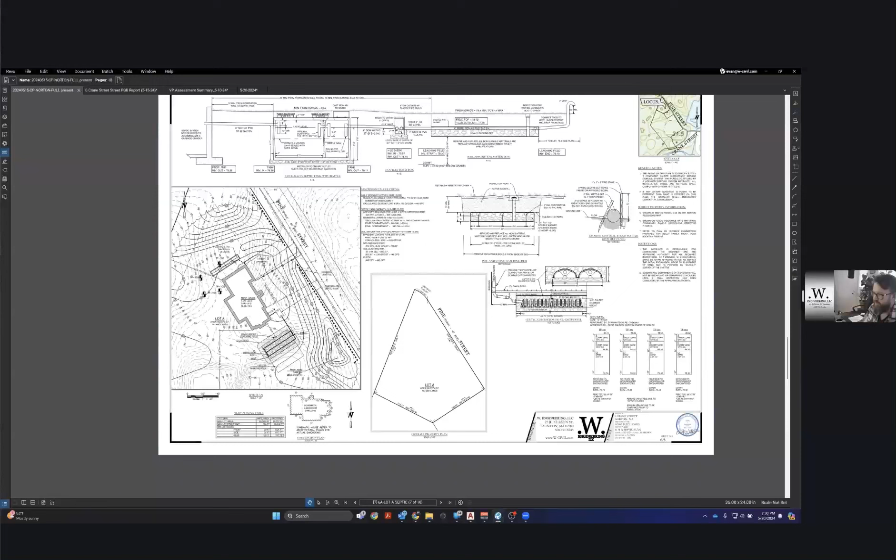Just to go over things again, this is just lot A with no resource areas on it or buffer zones. But we do have a rain garden / bioinfiltration area here. And we have our dry well for the roofs.

Lot B, you can see we moved the shared driveway a little bit further away from the resource area, pulled all the grading away. You can see this line right here is the 50-foot buffer, or 50 feet from the wetlands. There's no 50-foot buffer, but you know, we're 50 feet away or more. We've increased the size of the stormwater management BMPs so that there's no discharge and everything can infiltrate.

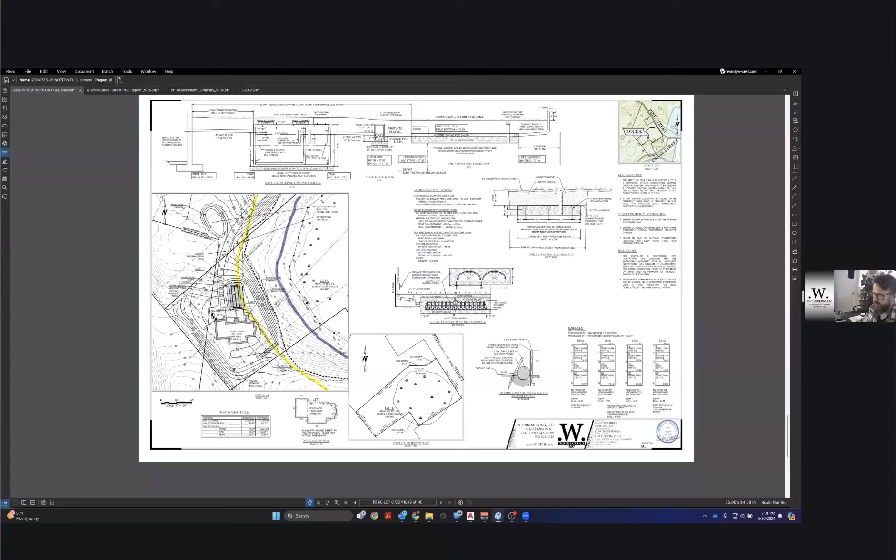And then, I should also mention that we reduced the amount of earthwork that's within the natural heritage area as well, and pulled away any infrastructure out of this, just a little bit of grading and conversion of woods to lawn. So this is lot C, same thing. We pulled everything away and we've moved the infiltration for the roof to the other side of the lot.

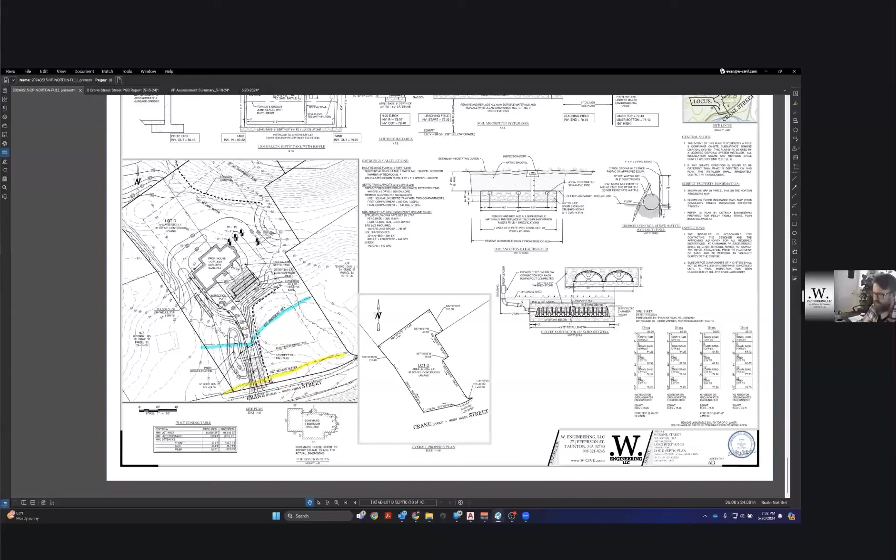Then finally, lot D, we've increased the size of the biofiltration area again. In the previous iteration, we just had maybe like 0.1 CFS coming out of this pipe in the 100-year storm, but now there's nothing coming out there in any of the design storms.

We did have correspondence with Natural Heritage. They wanted to see some photographs of these areas, and they wanted to see if we were to be using this area to do some of the earthwork to access the site. This area is currently owned by the owner. It's in agricultural, and there are some existing access roads. So they asked for some photographs of that side as well. So we haven't heard back from them.

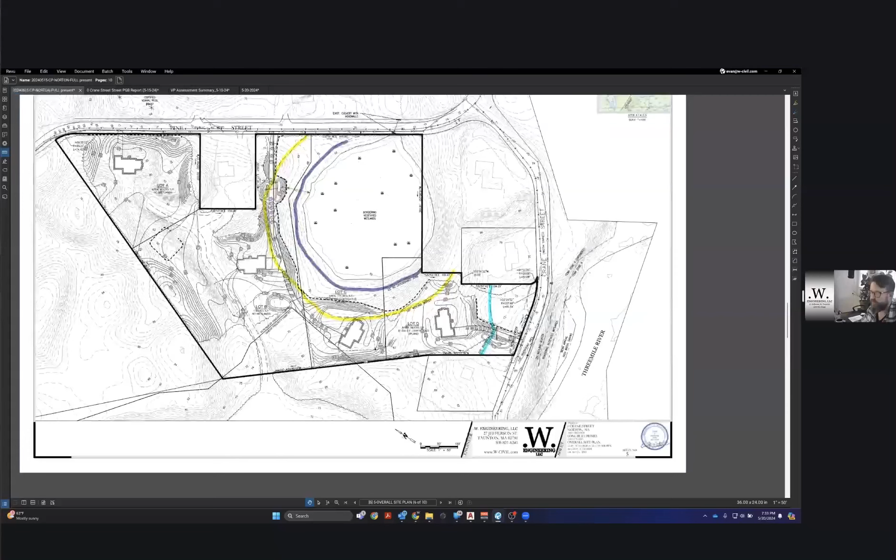That doesn't necessarily preclude you guys from acting, although I know you mentioned, Mr. Chairman, that we wouldn't be doing that tonight anyhow. But so that's the presentation. I'd be happy to answer any questions or hear any input from board members or the audience. I mean, maybe we should do this discussion after we complete our questions. So I'll hold off. Any commission members have specific questions about this project and the changes that were presented?

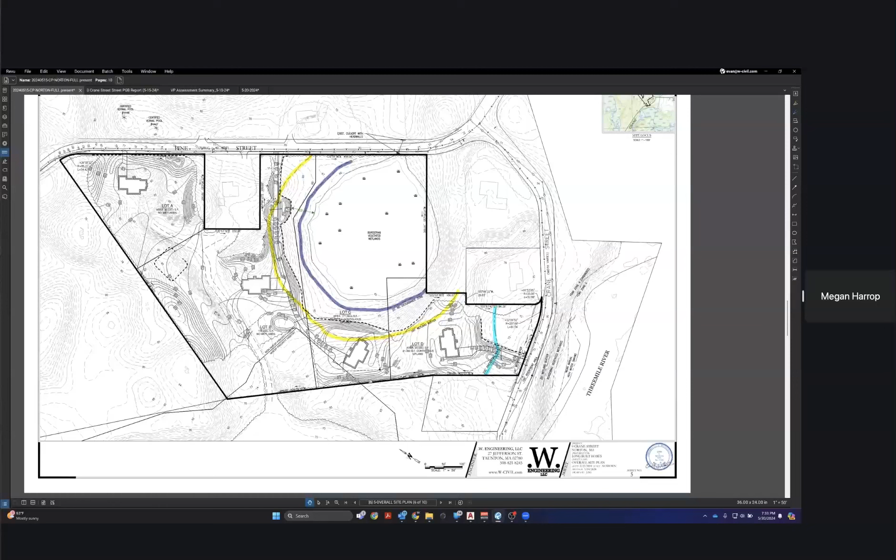Julie, can I ask a question real quick? You certainly can. Sure. Go ahead. Evan, I might have missed it. Did you provide an isolated land subject to flooding calc for lot A? Oh, I didn't specifically put it out there, but in the drainage report, in the existing condition, the water that flows to that spot is modeled, and it is able to infiltrate everything up to the 100-year storm. So there's no flooding or anything to that spot at all. Okay, thank you. No, good question. I apologize for not pointing that out more specifically.

Can you elaborate on that? So you did the calculations to show that it wasn't ILSF? Can you zoom in, first of all, on existing conditions of that area, if you would? Yeah, sure, right here. So right now we have this wooded area on Lot A, and a lot of this area flows to this depression. It was modeled for the 2, 10 and 100-year storm. Now the ILSF calculations are for a larger storm, and based off of how much water that holds, be it a quarter acre foot, would determine whether or not that's an isolated land subject to flooding. But in all cases, there was no or almost no water being generated to that spot, and there was no storage of any stormwater to that spot.

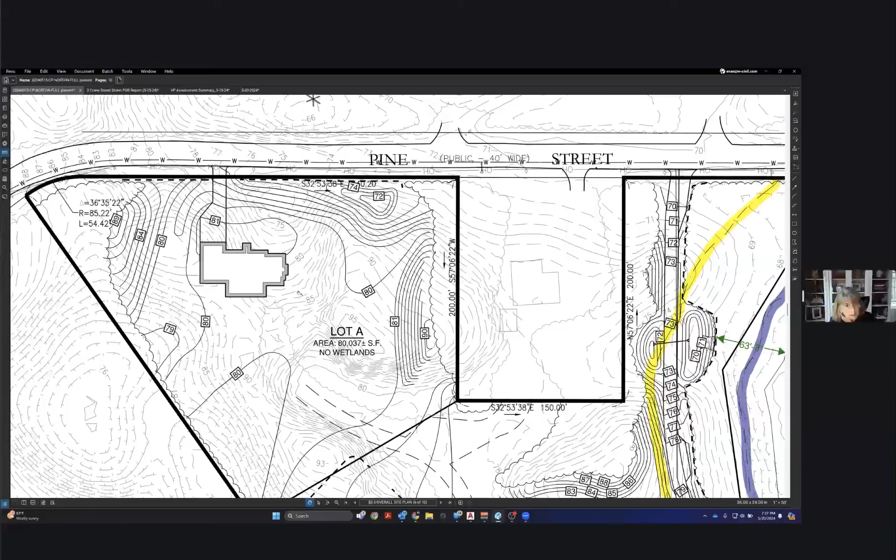All right, so any other questions from commission members? And it looks like we have a question from an audience member. So I'm not seeing any commission member questions. Computer labeled Neil Dion, if you want to go ahead and ask a question. So there you go. All right.

Neil Dion, I live at 171 Pine Street. I've spoken before at the meeting regarding this property. The first thing I want to mention, and this is information for the commission, I don't know if it's in the report or not, but the study at the swamp area for the vernal pool, they came out on May 2nd. Now, according to the Wetlands Protection Act, the window of opportunity is the first week of March till about April 15th or so. So, in my opinion, that was missed. So you didn't really get an accurate assessment of the area. Can anybody elaborate on that, or am I mistaken?

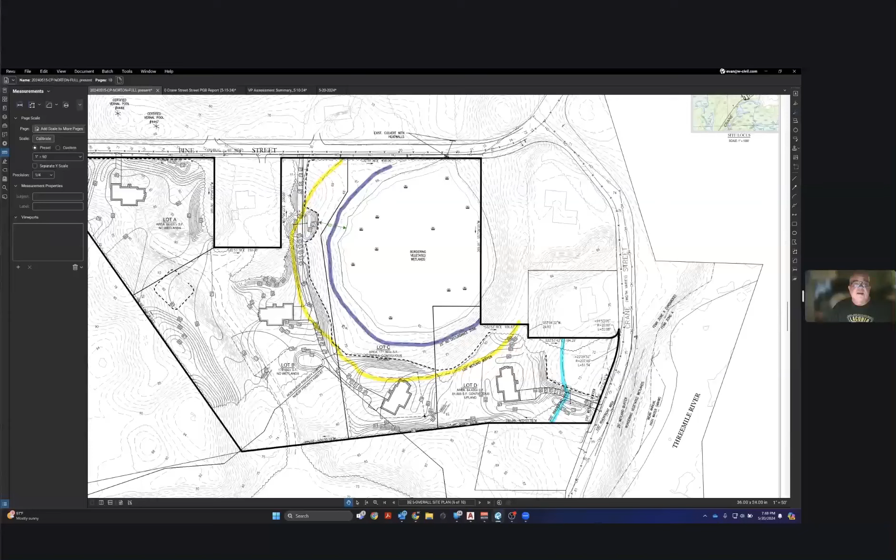Okay, thank you. My second question is the driveway. That driveway has moved awfully close to my property line. And Evan, do you have the distance between my property line and the edge of the driveway? Let me move to the other plan with more details so I can get a better measurement. Right. 38 feet, 37 and change. Okay, so that's within the limit.

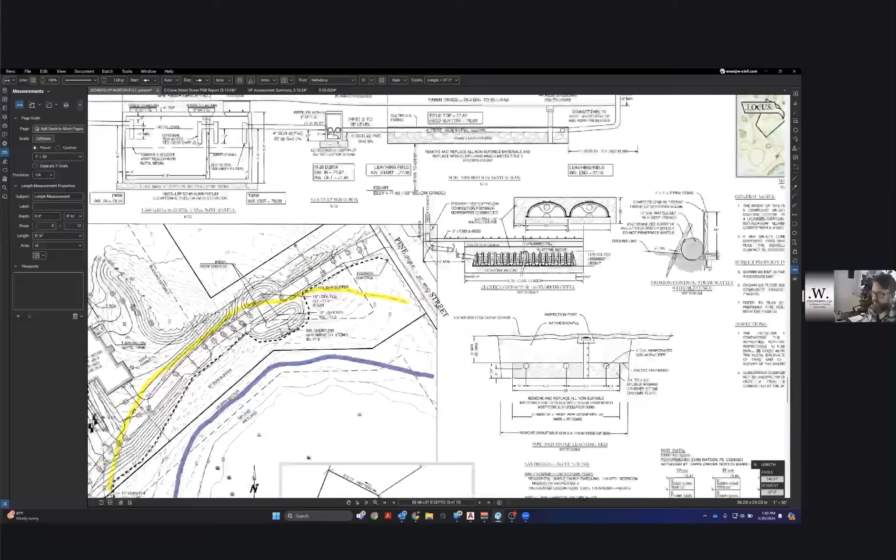But has the water runoff from my property been included in those collection areas? Yes, it has. When we evaluate these drainage components, we do what's called subcatchment area, and it does include any area from offsite properties that drain towards it, in both pre-development and post-development. Okay, because my concern is if something happens over there where it gets all clogged and it doesn't drain properly, my property's gonna flood.

You don't have any concern here. This property here is lower than your property. There is an operation and maintenance plan to direct the homeowner to clean these as needed. And there is an emergency overflow if, for instance, we have a very frozen time period and then we get a large rain, it would overflow, in a 100-year storm or greater or emergency, away from your property. Because we're at about elevation 73 here, and your site is about elevation 78. So it's a good 5 feet lower.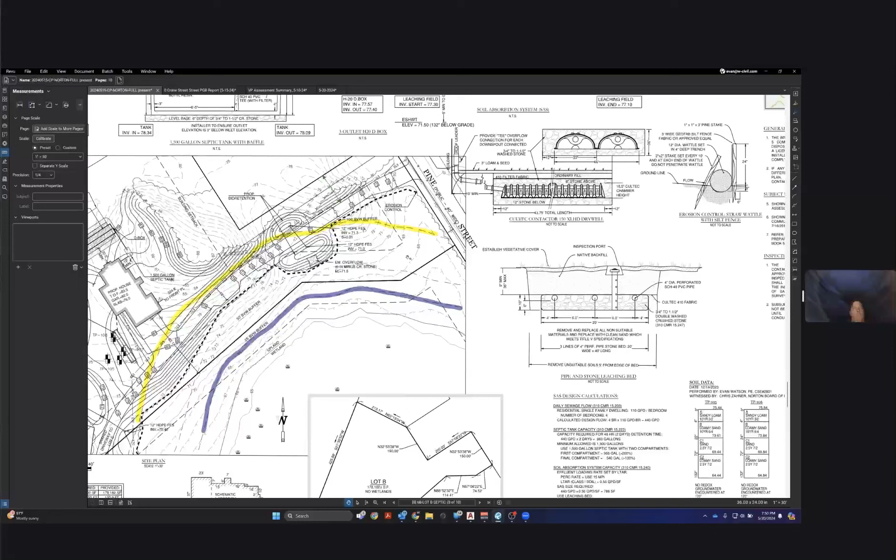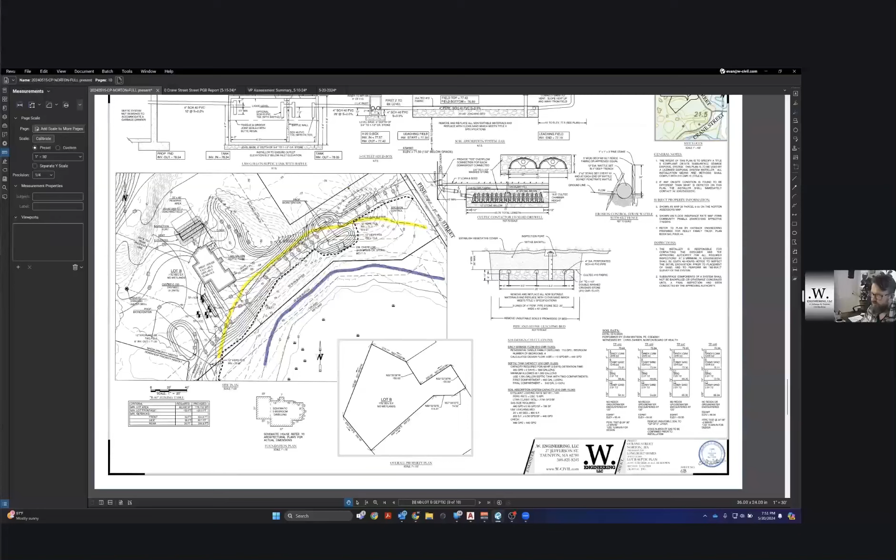But if you're gonna direct the homeowner to clean that up, what homeowner are you directing it to? Who's gonna be in charge of that? Because you got two homeowners. They're gonna start butting heads and have a fight over who's responsible. Well, there'll be an easement for both of these homeowners to be using this driveway. And that document would identify it, because the driveway itself needs to be maintained as part of the shared driveway, and that would be part of that component as well. Yeah, all right. I'm skeptical on that one. But thank you.

Is she all set, Mr. Dion? We can go on to the next question. I'm all set. Thank you. All right, you bet. So the computer labeled Lois Hanley, if you still have a question, now is the time. Otherwise, we are going to move on. Oh yes, okay. Hand is up, go ahead. She's muted. Yeah, I don't know. Are you able to take your computer off mute?

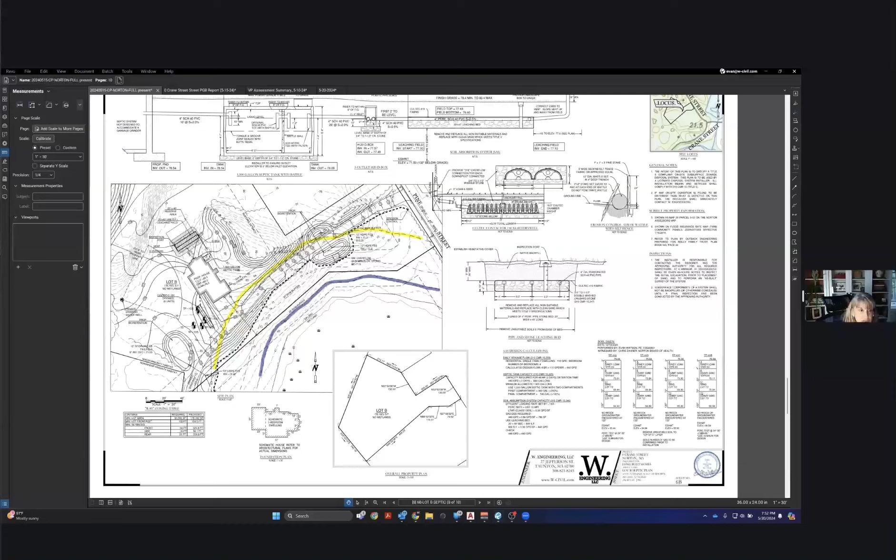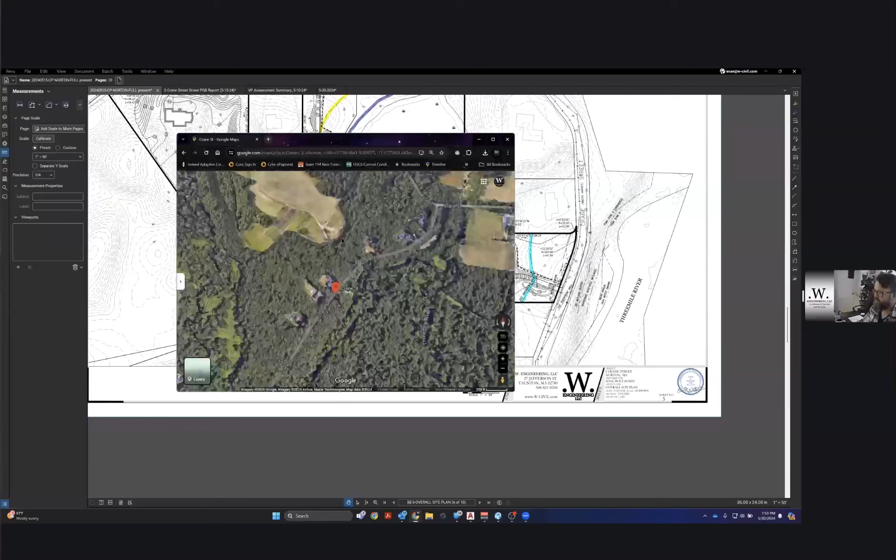Julian, while we're waiting, I had a quick follow-up question about the access. Can you go over where the construction access is going to be again? I think you mentioned through another property. There's an existing road that comes through this site over to here. I'm just wondering where it exits because we're going to be concerned with tracking from the site. Where does that road lead? And are there any other wetlands on that other site? No, there's an existing road that does not need to be modified, and it's here on Crane Street.

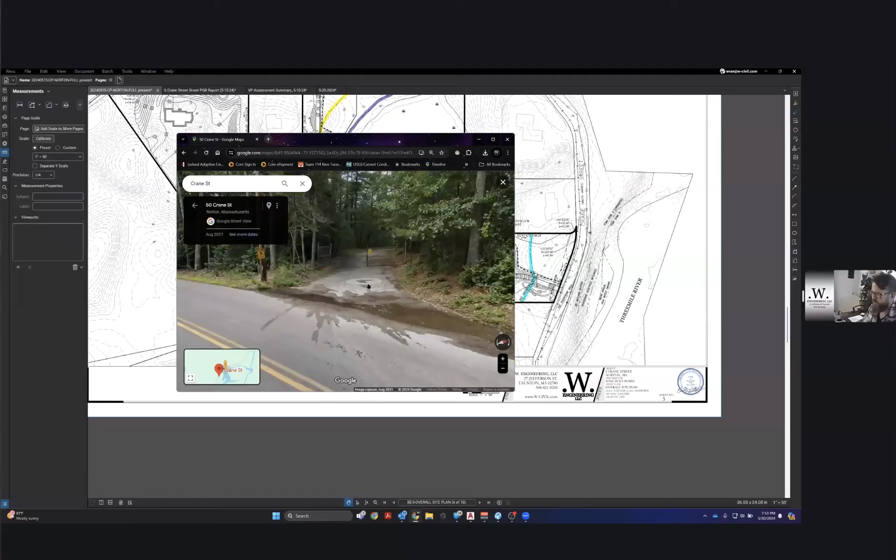There's an existing paved apron here that goes up beyond the high point, then it turns into a gravel road, and then a dirt road that accesses the site. Right now the homeowner, the landowner, can come and go on this. So it is protected here. If you wanted to put in a condition, obviously any tracking that we do on any of the roads, we'll make sure we have cleaned up.

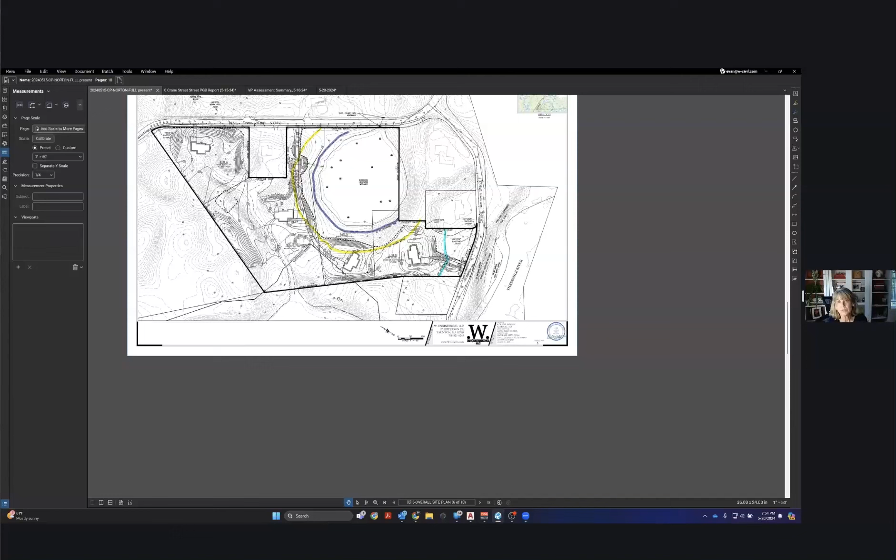So I'm going to ask you to show that on the plan coming out onto Crane Street, if you're going to use it for construction access, and show a stabilized exit. Instead of ripping up pavement, what you probably want to do is take that first 100 feet of gravel and turn that into a stabilized exit if you don't have that already on there. Yeah. So we have stabilized exits.

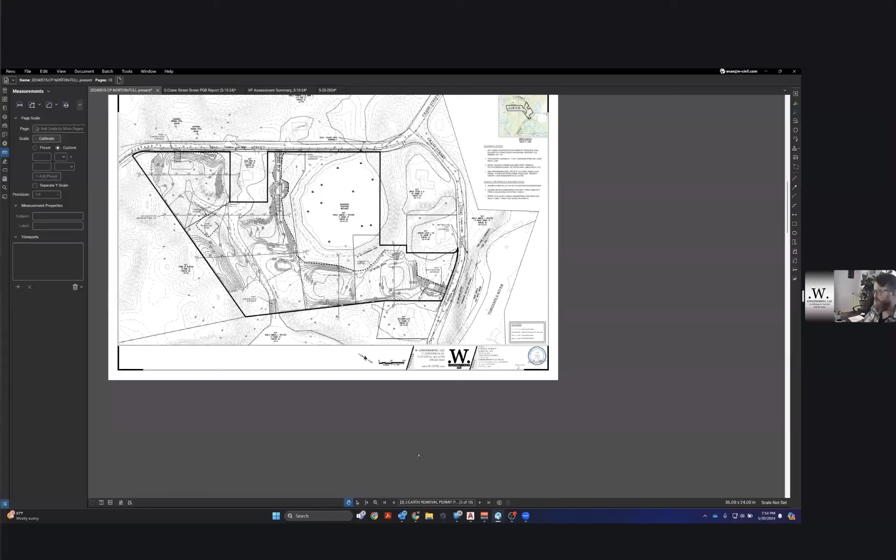At each of the sites that's here. Not on Crane Street though, right? Right. That's not at the street, so. And then here, this is all paved. I don't know if you can see that clearly, but this is all paved and stabilized up to the high point and beyond. So anything that would come down here is on a paved, stabilized surface coming through here.

But you're then gonna be tracking it onto Crane Street. So wherever that pavement ends, you mentioned maybe gravel? So that's where you'd wanna put your exit. So that first stretch of gravel, the first 100 feet, maybe you wanna take that gravel out and put a stabilized exit there, so that by the time they get onto the pavement, they won't be tracking it onto Crane Street.

Very good. And you could probably show that on the plans so we can approve it, because the contractor is going to the site, so we have to make sure Crane Street's gonna be free of any sediment. So it should be part of your SWPPP. Very good.

All right, so now, computer label Lois Hanley. Yeah, hi, my name is Eric. I'm speaking for my mother. I live with her here at 50 Crane Street. And we're discussing the same situation that Neil Dion was speaking about, the vernal pool that's out in the

back, supposed vernal pool. I've lived here for 50 years, and that area in the back, most of my lifetime, has always been full of water. I've been back there as a child, into my teens, collecting frogs, turtles, and salamanders and all kinds of things. And we do have varying depths on that pond. Sometimes years are a little bit drier and sometimes they're a little bit wetter.

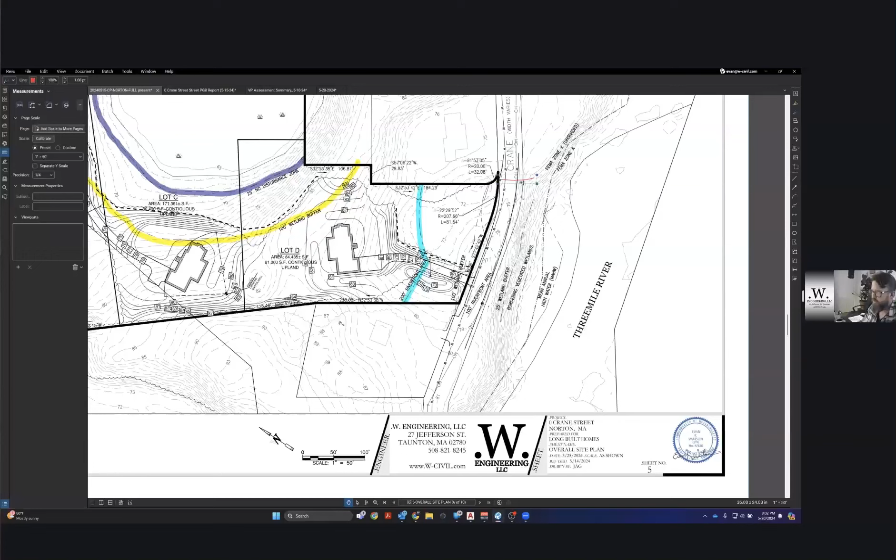So all this water heads this way. And then there is a small amount of water basically from here that goes into that depression, but it will ultimately be less than what it is right now. And that's what we're charged with in the act, and just as an engineer, to make sure that all the abutters don't see an increase in stormwater. Okay. Because we're about similar elevation to that swamp that's out in the back, when the groundwater rises, it gets through our foundation walls at the footing and the stem walls, it leaks through there a little bit on high water storms. So we don't need any more infiltration of water that's already building up.

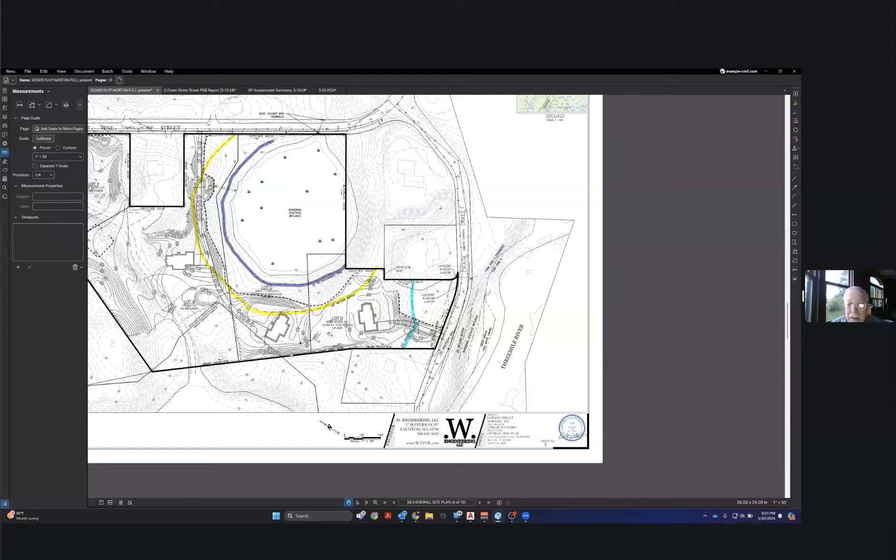All right. Well, you kind of summed up the intention of the Wetlands Protection Act, and that's really the summary of this whole process, to be sure that neighbors are not impacted by new development. Okay. Well, thank you very much for your time. All right. Very good. Thanks for your question. So if there's no further questions or discussion, as we mentioned, we're not going to be able to close tonight, and with your permission, we'll entertain a motion to continue these collective hearings until June 10th.

I have another question, Mr. Chairman. Okay, Mr. Dion. It's not really a question. I want to piggyback on the access road. That road and that area behind there cannot be used to access for construction. That is APR land. It's restricted. It will require a special permit through the Massachusetts Department of Agriculture. And chances are that they are not going to allow that. So I just want to throw that out there. So your options are going to be from Pine Street and Crane Street to access these properties for construction. Very well. That's all I got. Thank you. All right, very good.

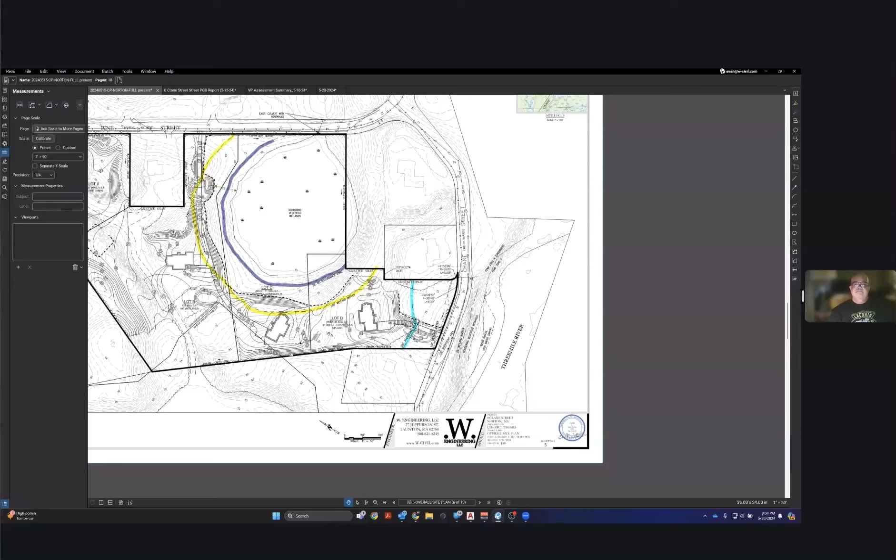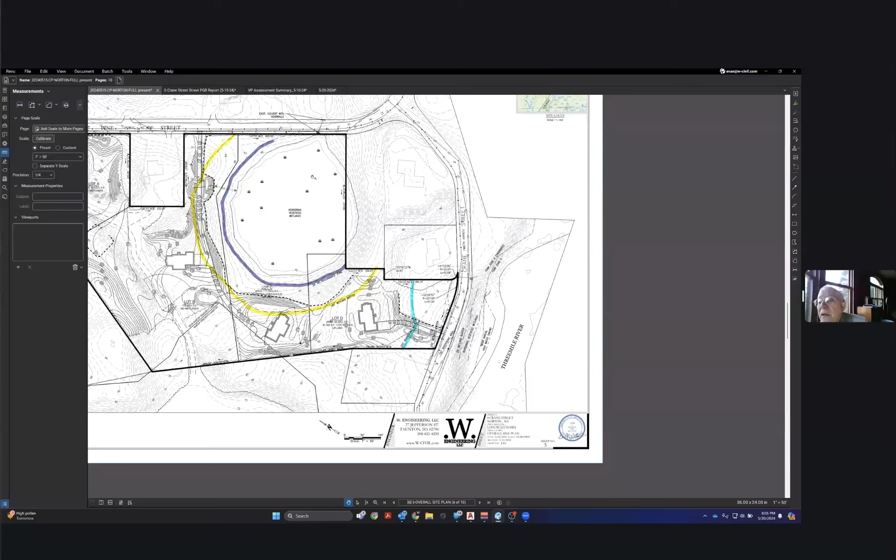So I think we're at the continuation motion step. Mr. Chairman, I would request that the board continue to the next available hearing. Okay, so Dan made a motion to June 10th. Second. Seconded by Lisa. So beginning with Dan and Mark. Aye. Aye. Lisa and Paxton. Aye. Aye. And Joe, and where is our last member? Tama had to get off. Julian, I have a conflict of interest, abstaining.

Okay, but we lost a member. Tama. Tama had to leave, is that what you said? Yeah, she had a conflict, she had a meeting, but she might come back. Okay. All right, so we have Dan as a yes, Joe as an abstention, and Paxton.

Was that an aye, Paxton? Yep. All right, and then Mark and Lisa? Aye. Aye. And I'll throw in an aye. So, Dan, you got all that? Oh, I'm sure Megan does. Okay. Well, Tama dropped out, so that was the only one.

All right, so our next item is file number 250-1144, 0 Reservoir Street, a 14 lot subdivision. Do we have a representative of the applicant, or is this a request to continue? They requested to continue until the 10th. All right, looking for a motion. So moved. Second. I have a motion from Dan, seconded by Joe. Dan and Paxton? Aye. Aye. Joe and Lisa? Aye. Aye. And Mark? Aye. And I'll throw in an aye. And Tama is absent.

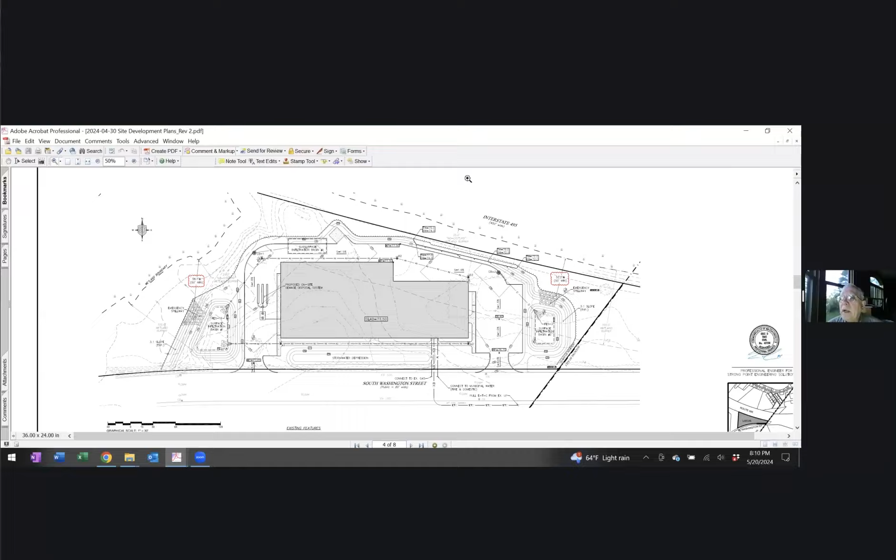So moved. Second. I think Mark got the second by a microsecond. So motion by Dan, seconded by Mark. Dan and Mark, how do you vote? Aye. Aye. Lisa and Paxton? Aye. Aye. And Joe? Aye. And I'll throw in an aye. So, carries. I don't think you're gonna have to attend next meeting, but you can check with the office, Eric, because I think it's primarily, we're happy, we close, and then we act on an order of conditions. Fantastic. I will definitely touch base with Megan and John and see what we can do. All right, very good. Thank you. Thank you.

We are now up to our request for certificates of compliance, and this is a little bit bumpy because the first request, 250-585, 61 West Main Street, the Honeydew Donuts, or Honeydew, I don't know what they call themselves now, still has some questions. So I personally would favor just tabling this till next time. We can certainly close it out next time. Why not? Yeah, I mean, the actual work on this needs to be reviewed to know what was in the ground with regard to acting on the new proposal.